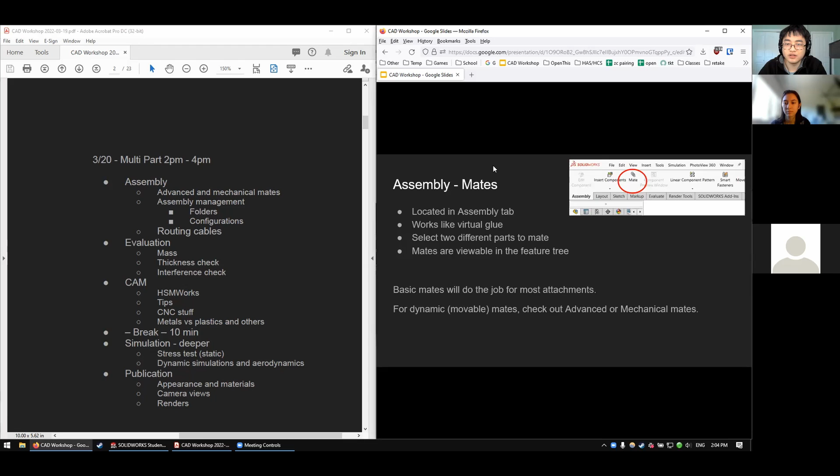Okay, with that said, let's go ahead and get started with this. Okay, so let me close this guy out. And I'll go ahead and get started with the first one on the menu.

First one up is basically mates in assemblies. When you have an assembly, it's made out of multiple parts or even sub-assemblies. So an assembly consists of a bunch of things in it. You want to make sure that those guys are all attached to each other.

So you will generally be using the mate tool. It's located here in the assembly tab, the big paperclip icon. It lets you mate things together. You'll see here, everything's already mated, so this might not be a very good example. But we'll see here, there is a double paperclip called mates here, and it shows you everything, how they're connected together.

For example, we've been using a lot of the basic mates just to fix things together. So these two, the axes of the rod and the rod itself, are going to be concentric. So they're locked in place in that one direction. And then we will set the width to be equal, so it's centered within the two. There's a bunch of tools like this you can use.

Let me just show you what's going on inside the mate feature. So when you click on mate, it shows you this large window on the left-hand side. Basically, you select two or more things to mate together, and then you select what type of mate you want to do. By default, these ones are the basic mates. They do the job to get things done, making sure that things are anchored to each other.

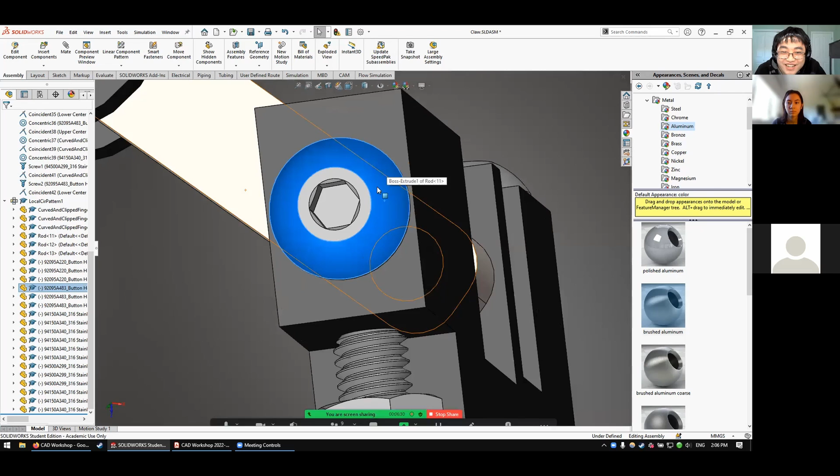That's not a good one actually, that one's movable - try to click and drag it. It's just like fixed or something. I think this one should be... oh, it's not locked down. Okay, so that one is rotating - we didn't fix the rotation of that. That's not a big deal though, it's just a screw. But once you do fix something, it'll be fixed in place because it's anchored in all dimensions.

One of the other things I want to show you was the more advanced mates. So you saw here in the mates tab, we have a bunch of stuff. Width was not in the basic mates tab, I believe - I think it's under advanced. Yeah, so you see here 4 tabs: standard, mechanical, advanced, and analysis. Most of the time, standard mates do the job, mate things together, keep them together. But also some fun ones, especially in mechanical or advanced.

In mechanical, you have a lot of things that let you have stuff that moves around. In this tab, you might be using things like hinges, or maybe gears, possibly even screws a lot. You don't need to use the screw mate for screws like this, but if you want to be super cool and have the threads align in the screw and the recessed hole, you can use the screw mate. For the most part, you just get away with doing concentric, then making sure the head of the screw is coincident with the flat top. That does mean it can rotate, as you saw before, but if you want to get rid of the rotation, you should use the screw mate.

It'll let you rotate it, but it'll then follow the threading of the recessed hole. Some cool stuff there, but I never use it because it's a big headache. I just do concentric and coincident.

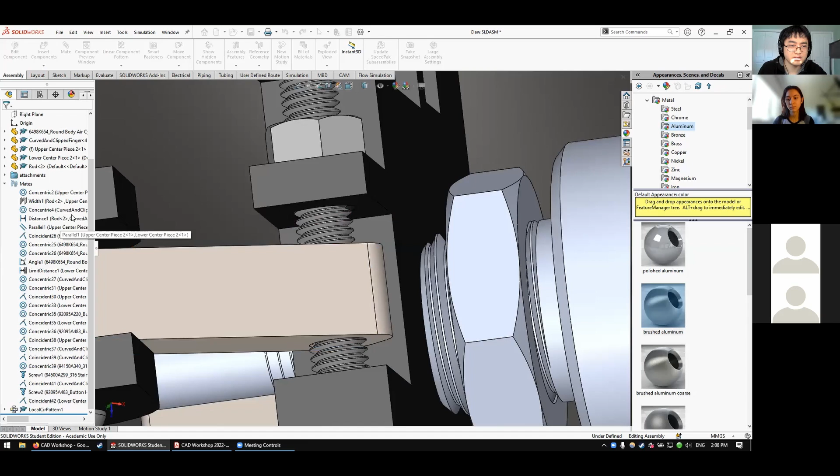These two are probably the most important ones, I think. This one is fixed minimum and fixed maximum distance, and it can vary between those minimums and maximums. You see how that's used here in the claw. I believe it's used, where is it, a limit distance over here.

So this is a piston mounted to a claw. For this design, we wanted a single piston, like a claw machine pretty much, opening and closing the jaws. So to do that, we set a minimum and maximum distance for the piston length. We have a minimum of 5, maximum of 45 millimeters.

If you go out of the mate and try to drag stuff, you'll see it does move around. We can close and retract. It's a cool way to add some... it's fixed? No way, okay, there we go. That was not fixed.

So it lets you make cool dynamic assemblies that actually move. You can show them off. It looks really nice when people come and ask you how it works if you don't have the robot with you. It moves, shows you the range of motion, and lets you see if it's going to work before you even print it out or build it yourself. So good to have under your belt.

These mates let you restrict movement in certain dimensions, and retain some movement in other dimensions. There's a lot more mates than that, but for the most part, the basic mates like coincident, concentric, and some advanced ones like limiting distance for pistons and rotation stuff could be useful for you as well.

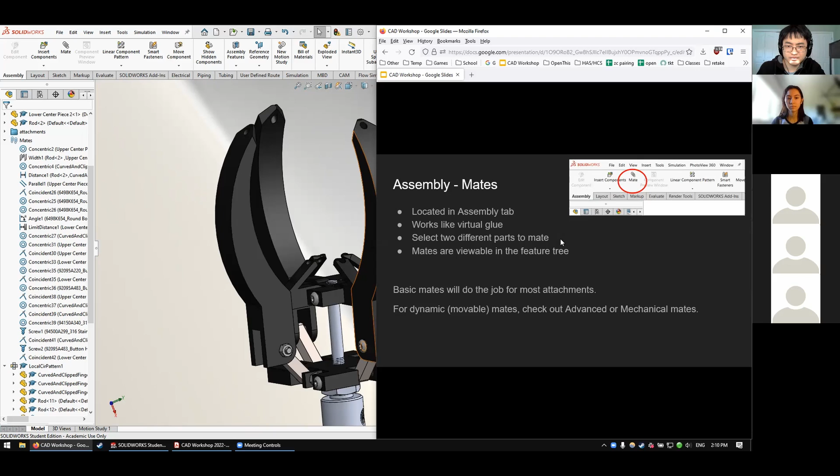Okay, assembly management. So you see here on the left-hand side, it's pretty messy, a bunch of stuff. Some of them have numbers in front of them, like part numbers from McMaster.

When you have an assembly, especially when it has a lot of parts, you'll want to use folders. Especially, you want to make sure stuff is named appropriately so you can find where it is. Just earlier, I made a folder for attachments that contains a bunch of screws and stuff. See how those orange bounding boxes hover over the screws and nuts.

You can add stuff to folders here. It doesn't really change anything, it just makes sure it's nice and grouped. You can find where stuff is, and just hide it when you don't want to see it. You want to focus on the big pieces.

To do that, you click on one or more. You can click on one and control-click on other ones, or click on one and shift-click on another to select everything in between. So select multiple or just one, right click, and hit add to new folder. Alternatively, you can just drag and drop it into an existing folder.

So just be sure to use folders when you're making large assemblies to make sure things are organized. You can still keep the main body pieces at the top root level, that's fine. But for small attachments, you probably want to keep those tucked away in a nice folder somewhere so they don't get everywhere and junk up the left-hand side.

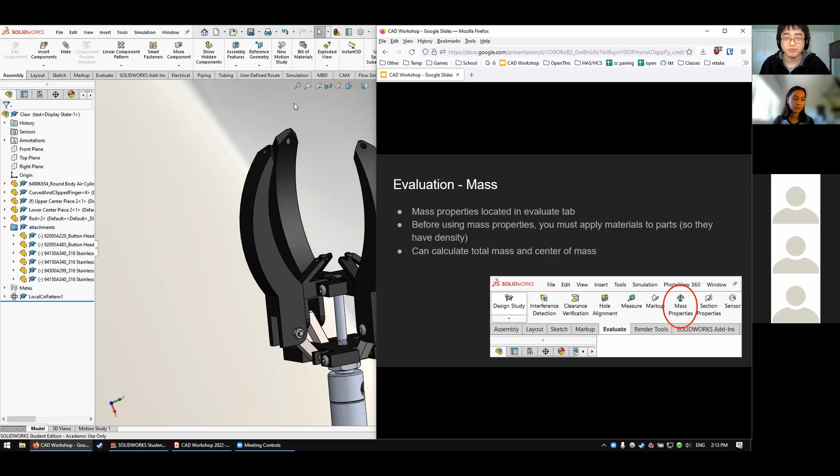I think I might pass the next one off to Naomi if you want to pull that up. Let me stop my share. Okay, one more thing I want to note about organization: you should keep all the files for an assembly in the same folder on your computer. Otherwise, you run the risk of SolidWorks not being able to find it, which is really annoying when that happens.

So for mass properties, I have here a really simple assembly, and I have applied materials to it. When you do mass properties, it's really important that you apply materials to all the parts in the assembly. Otherwise this won't work because SolidWorks won't be able to figure out the densities of the materials. So I'm going to show you real quick how to do that.

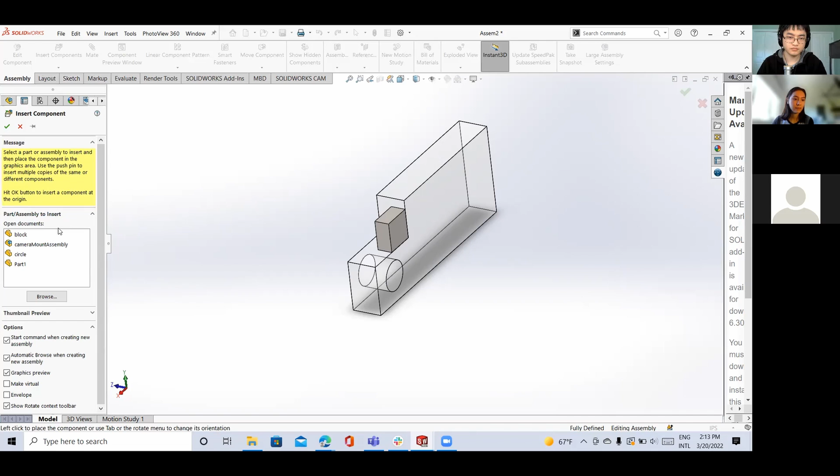First, I'm going to insert one more component. Let's do this circle. Okay, so I have my circle in my assembly. I'm going to real quick mate it somewhere. Let's mate it here. That was a horrible mate—hold on, that was a really bad one. Okay, let's try that again.

So that button we just clicked lets you flip the alignment of the mate. That's an important thing to do if you ever get stuck and have something clipping inside of the object—you might need to flip the coincident mate. Okay, that is good enough.

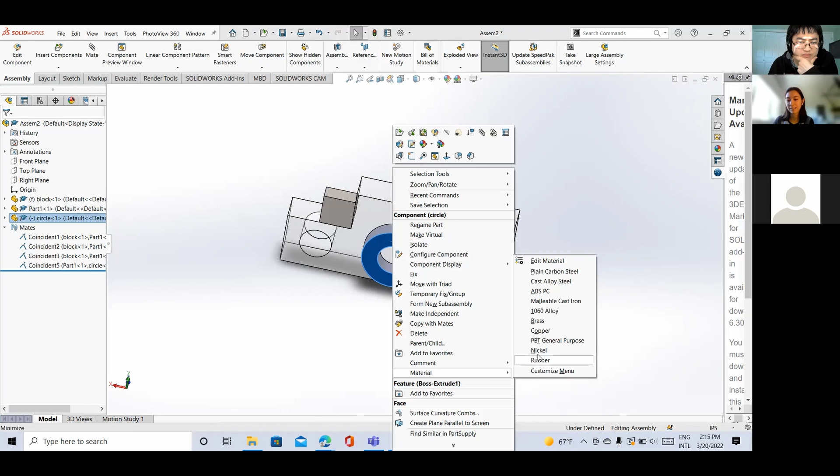So now my assembly is all mated together, and now I need to apply materials. I'm going to right click on this, and this menu comes up, and at the bottom right here it says material, and I'm going to come in and edit the material of this part. I have all of these options here, and for the purposes of demonstration it doesn't really matter, so I'm just going to choose hot rolled bar steel and apply it. I think it's applied—so now I'm close, and you see the color has kind of changed.

I'm also going to show you how to change the material for something that already has a material, and it's pretty much just the same thing. You right click material, edit material—you also have this little shortcut menu. So I'm going to change this to brass.

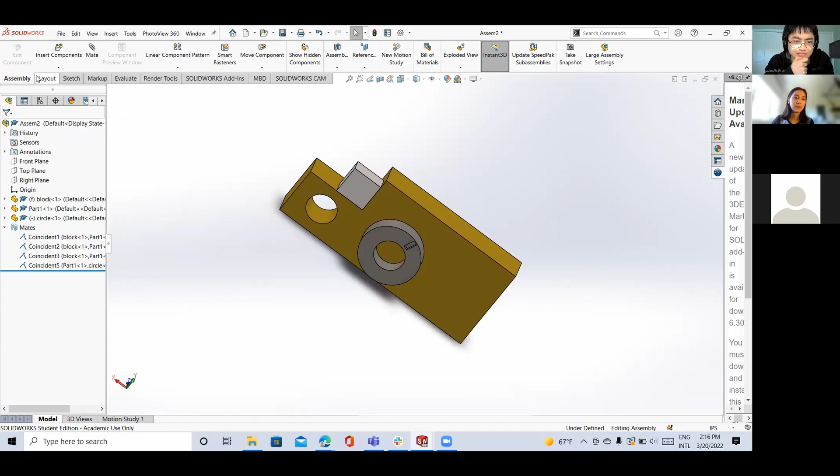The color has changed. Now we go to the Evaluate tab, Mass Properties, and Rebuild, and it comes up with this menu that gives a big summary of all the mass properties. The important parts are the mass, 5.88 pounds, the volume, and the center of mass. Everything else is kind of complicated and you probably won't be using it, but those are really useful things—we especially use volume because we work underwater, so volume is useful for calculating the buoyancy of our ROV.

So yeah, that's how you use the mass properties. Next one up—let me share my screen again. As you saw in the image, just showed you mass analysis: you can see how massive it is, how much volume it takes, center of mass and stuff.

And a short departure, you can also take a thickness analysis to see how thin or how thick stuff is. This can't be used on assemblies, only parts. So let me just demonstrate what I mean by that—let me go ahead and open up a part.

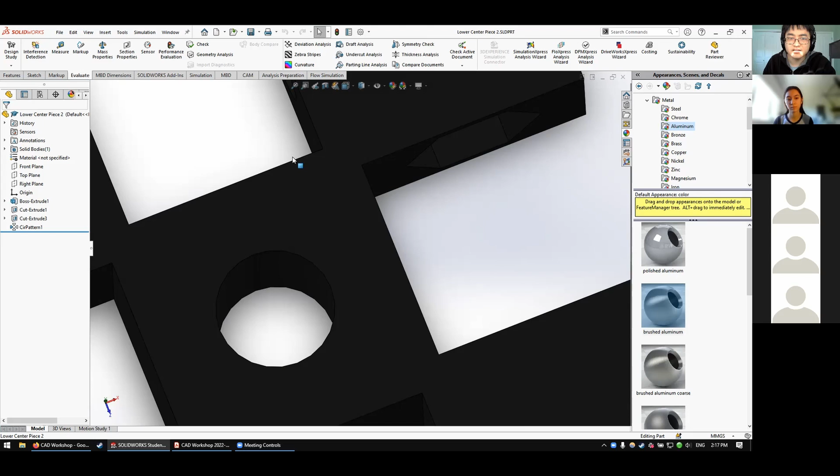So I have here a little piece, and I want to go ahead and see how thin stuff is, because I want to know if this distance from the hole to the left side is too thin to be printed or something, and might just snap off immediately. I want to know how thin that is, and how thin this diagonal is. You could, of course, just manually measure it using the measure tool, but then you have to measure everything, and you don't want to do that.

So just press the thickness analysis—it's under the Evaluate tab. Set the analysis parameters, thickness scale, nice color scale, and hit okay. Oops, I need to hit sort of face, I believe... show thin regions. It's not showing up—I think I need to select this even lower. Okay.

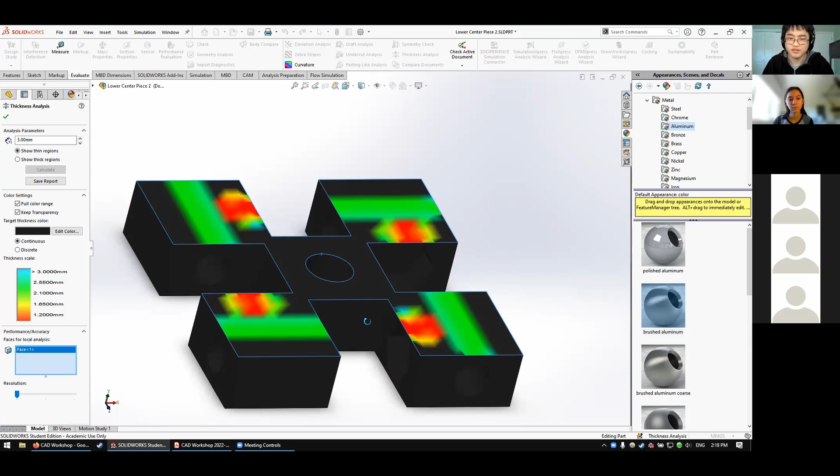Okay, so it's also showing me stuff inside. In this device there are small screw holes that we're gonna thread some rods into to secure this stuff. You see here the scale: red means really thin, green and blue means okay-ish. It gets really thin around here, I cannot even see that. Let me see if I can orientate the screen even better.

This hexagonal face is very thin to the roof, so that might be something to look out for. It's about 1 millimeter. If we try to print this, it'll probably be okay, but be careful, it might snap off. Keep that in mind as you design your stuff.

You use your thickness analysis to see if something is really thin, something you haven't considered. I did not consider this actually. I was only thinking the diagonals here might be too thin, but this stuff's really thin as well. I think it's because I selected my local analysis face to be only the top, so it only checks from a face down view - will the thickness from the face down be very thin? So it did not measure this, only measure this.

I think if I cleared here, and I will do it for everything. Let me just do a quick check. Okay, it does it for more things now. Not everything that I wanted, but good enough. So use thickness check to see if stuff is too thin or too thick to be printed.

Okay, then keep opening the wrong PDF. Once again, only for parts, unfortunately, but you can just run it for multiple parts in the assembly, so that also works, but just a bit of a hassle.

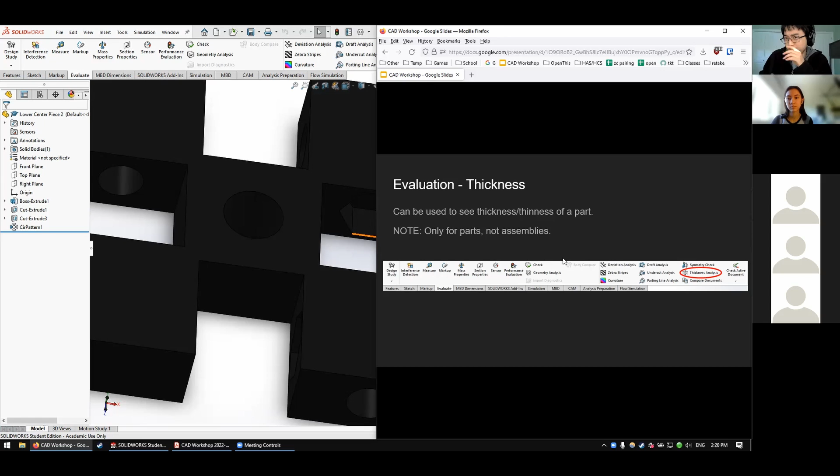And the next one I want to show you, or do you want to show this one, Naomi? I need to get stuff prepped for the next part. I don't think I have the right part open for this, but I can make something interfere. Okay, gotcha, okay thank you. All right.

So I'm gonna real quick go back to that horrible mate I did earlier. Perfect. Now the...

Interference detection shows you where parts are overlapping in your assembly. So we can either select the whole thing, or if you don't want to run that, say you have a really complex assembly, you can clear that and select only the parts that you want to check for. If I calculate this, it'll get mad at me and make an annoying sound and say this part is no good.

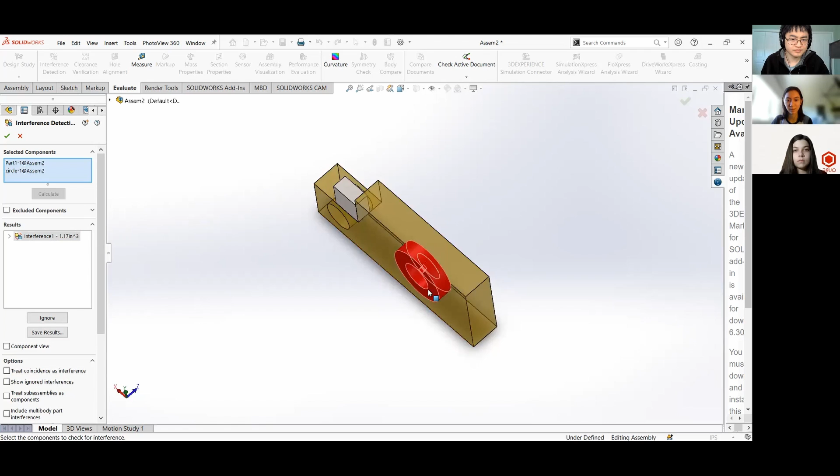And if there were more, it would show each individual interference in this box here. So I can also show if I did the whole thing - it shows the same thing because there's only one interference.

One thing to note when you do the interference check: if the number to the right of the interference is really, really small, it's probably a very small clip, like the threads of your screw digging into the wall of the hole - that's no big deal. But if it's something larger, then something's an issue. You need to check your mates, see if stuff is clipping too much. But for very small numbers that happen, it should be okay.

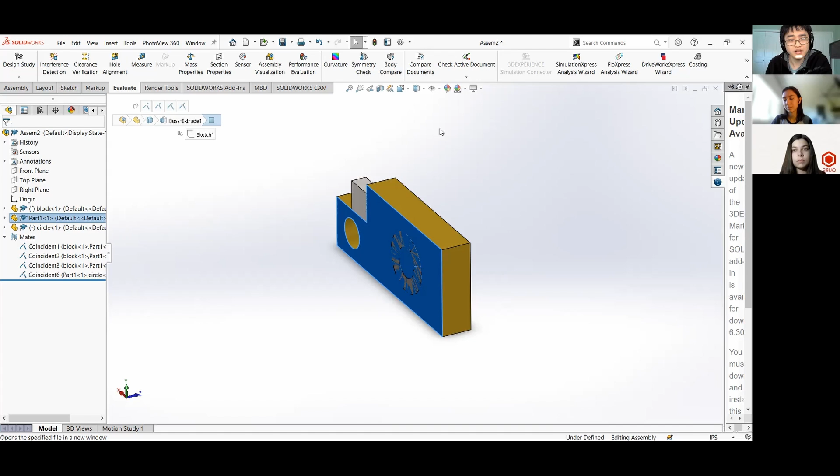So let me see if I can open up the part that's being talked about here. We use the plugin HSMWorks from Autodesk - it's an Autodesk-made plugin for SolidWorks, made by Dassault Systems, so it's kind of weird. There's also built-in CAM solutions and CAM plugins in SolidWorks, I believe, but we've been using HSMWorks, previously known as HSM Express, and it has been doing the job pretty well.

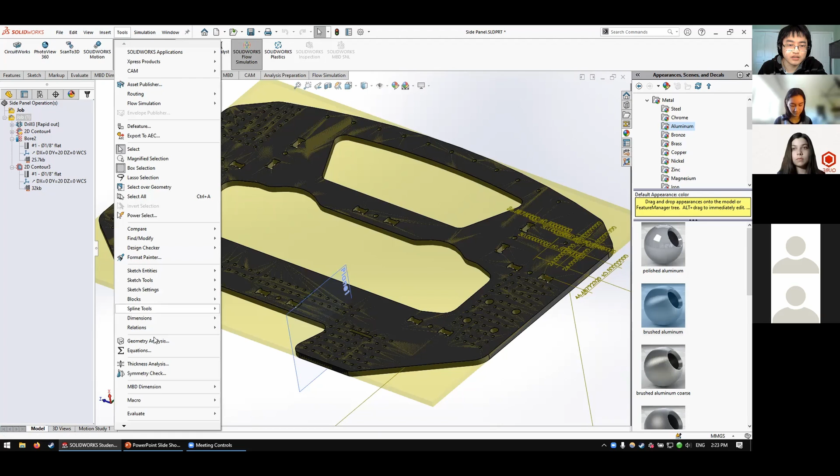So I'm currently in the CAM manager here on the left. You'll notice I have enabled, under add-ins, the HSMWorks plugin, which is currently on. You can also use the built-in CAM stuff here, but this works as well.

So basically, when you want to use a CNC mill or generate a CAM job, you will want to use SolidWorks and then generate a toolpath here. So I have here the default job, which has nothing in it, and job 1, which has some stuff in it actually.

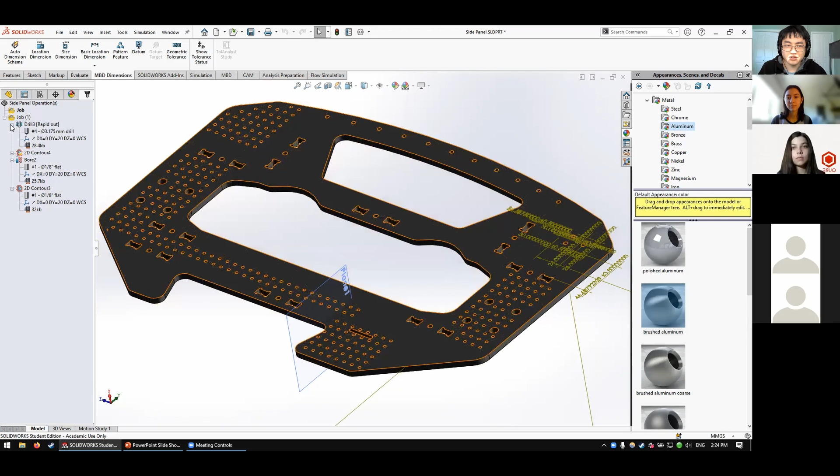When you generate a CAM job, you need to take note of certain special considerations, specifically what size drill you're going to use and what path you want to cut, what holes you want to cut. We're currently setting a 3.175 millimeter drill, which is nice because we want to cut out a bunch of M3 holes for modular attachment mounting on the panel, so you just dig down and straight back up without needing to wiggle around. If you select too large a drill, you can't dig through the holes because it'll make the hole too big, so consider the drill size as you make the jobs and design your parts.

You see here, dx equals 0, dy equals 20, dz equals 0, WCS - I think that's world coordinate system. Basically the drill is going to start at 0, 0, 0. You're going to zero it at this position, so when you put your stock material in and start the CNC mill, when you zero it, it'll say I'm at 0, and that 0 is defined as this coordinate value. So that's something to consider.

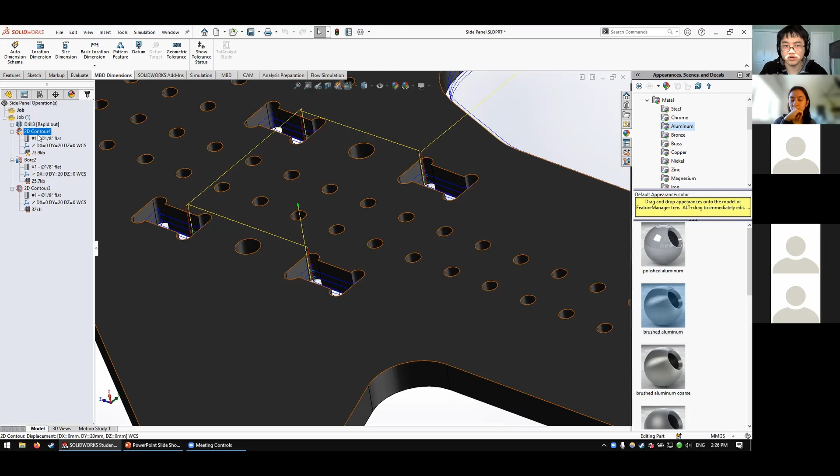And then we have here 2D contour 4, bore 2, and 2D contour number 3. So contour 4 digs out multiple things - these large notches for interlocking with other large HDPE plates for the body of the robot. Basically we've set the settings for the drill, and then we have a bunch of different toolpaths done in sequence. First, the drill digs out these large notches for interlocking with other plates. Then it lifts up and goes to bore 2, which digs out large mounting holes here, here, and for these guys over here, and for the top handle for padding.

And then lastly, it's going to do the outside edges - the blue lines here notify the outside edges. I'll show you. If you right click on it, you can see a bunch of different stuff. The most important ones here are probably generate toolpath, simulate, and post-process. So I'm going to click on simulate to show you guys what will actually happen.

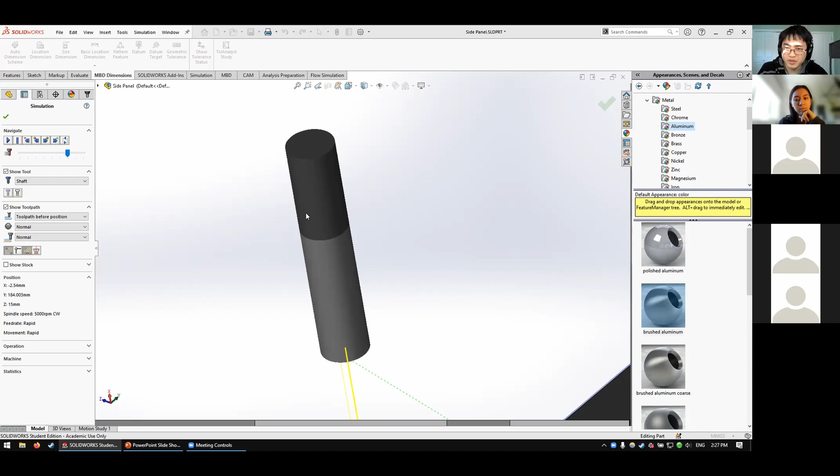I wish I was at the lab - if I was, we could actually show you how it works, but it takes a while to set up. You see here, that little guy is the M3 drill, 3.175 millimeter diameter. If I click on the play button, it's going to start moving around - starting here, doing the small holes first, going around nice and easy.

Let me bump up the speed a bit. Yeah, it's pretty nice - it's like looking at a 3D printing slicer and checking out how the thing's going to be cutting stuff. Very similar to that - layer by layer, path by path, it's going to cut out the material you want.

Once you've set up your paths and checked a preview for any issues, you can then generate the toolpath - click on this button, it'll save some things. Sorry, I got the order wrong - you generate the path, then you simulate the path, and then you post-process it.

If you consider that cheap, that is. Okay.

So you see here, just be sure to check the right box for your machine. You may need to go to your manufacturer's support website and download the right configuration files, but it should be in there somewhere.

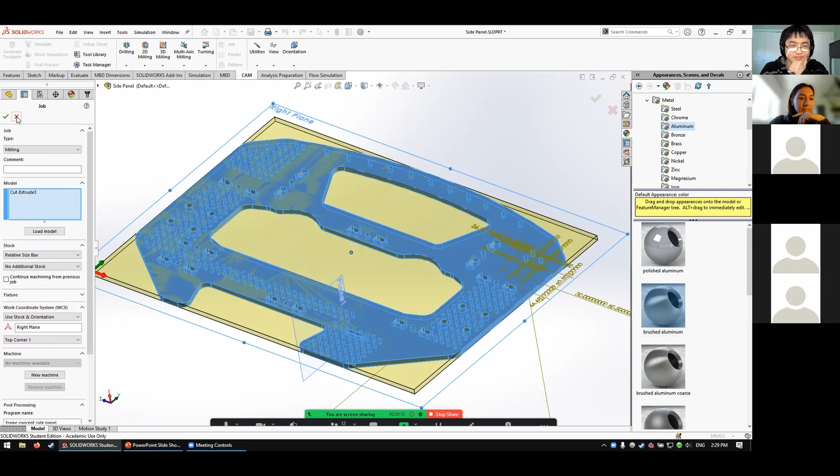So there are a few different options you have when selecting what type of operation to add to the job. You usually want to stick to drilling or 2D milling. Since we do routing, that's what we stick to. Drilling is for boring out holes.

Can you go to the drop-down tab for 2D milling? It's really slow here. Okay, so for 2D milling, I was just making a new drill. 2D contour, that's kind of weird, but this one also does the inside edges, so we can do this one. Let's take a look inside here.

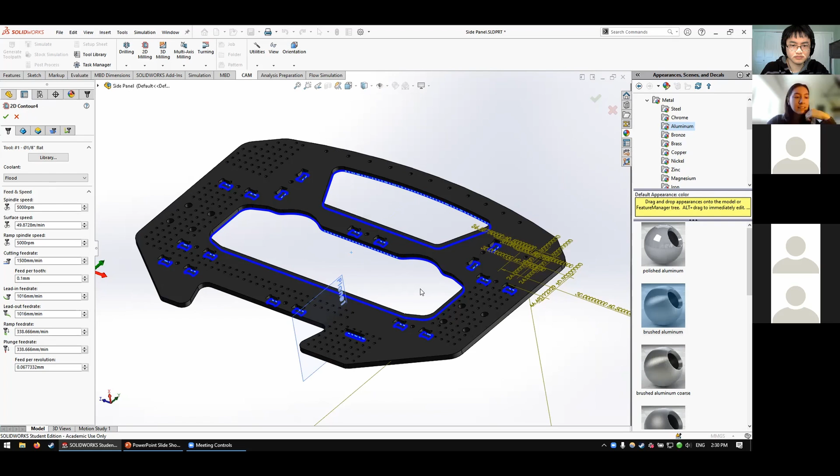So this is one of the plates from, I think, two years ago. A bit outdated, but it still shows you everything that happens. A 2D contour is going to cut out a kind of weird looking shape like we have here, these little hourglass things. I don't really remember all these little settings, but you want to select, I believe, the bottom edge of the shape you want to cut out.

And then you're going to have to adjust the feeds and speeds, and that's going to depend on the material you're using. Since we use plastic every time, it's the same for us every time, but you guys might use aluminum or steel, so you're going to have to look that up.

And then we also use some other types of 2D milling. Can you do the little drop-down? Oh, fancy, okay. Yeah, I need to close out this one. Can you erase your annotation real quick? Okay, so here, what do you want to look at?

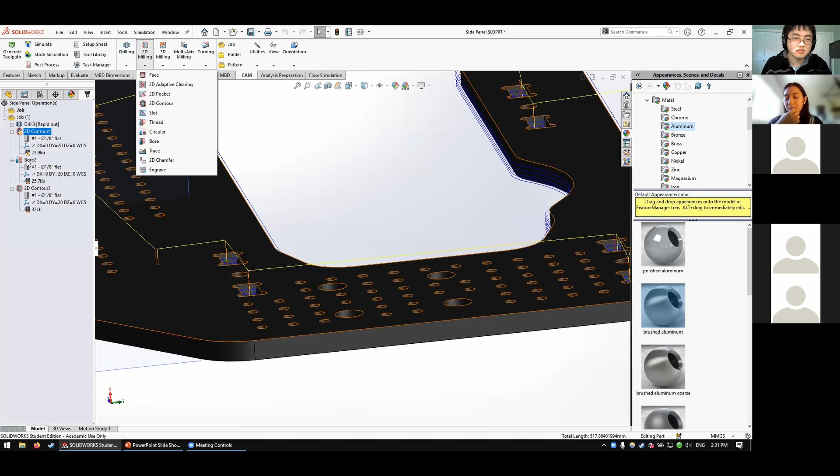Bore? That's just like straight down, almost. Bore is for boring out holes, and that's just going to bore out with the diameter of your end mill. I want to cut it real quick to show - it will drill down, and if it's larger than the drill size, it will do a little wiggle around to make sure it's large enough. So not just the size of the drill, but also a little bit larger if you want. It's pretty versatile, it cuts out circles.

And then for other things we use 2D adaptive clearing, and all of these basically are different for different types of cutting out - they cut out different shapes, so it's different for different types of shapes. Sorry, that wasn't very eloquent.

But the really important thing you want to do when setting this up is make sure that the direction your end mill is spinning, with respect to the way it's moving, is correct. You can typically see that when you do your simulation, but you set it up when you're setting up your job. SolidWorks usually does a pretty good job of simulating that, but sometimes it won't show.

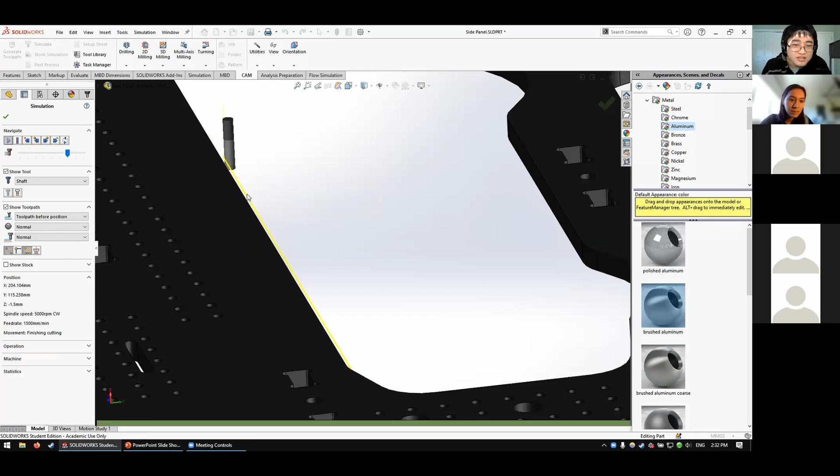Yeah, I don't remember how to check it. I clicked on simulate, clicked the play button - did it go? Okay, there it is. Does it show rotations? It doesn't show rotations, but it'll show which side it's cutting out, and if it's on the wrong... oh I see, spinning - it says clockwise, 5,000 RPM clockwise. So clockwise, yeah, that's okay here. And if it's spinning the wrong way, sometimes it won't generate the toolpath.

So notice we are moving counterclockwise. We want it to spin clockwise so it spits the material out behind it as it goes forward. So that's something to consider as you generate your tool paths. Let me see - okay, I think that was pretty good.

I also wanted to go over this, it's a big wall of text, but let me go over it real quick. With Slugbotics, we have a general workflow for how we do CAM stuff. It's a long list, but basically we start in SolidWorks, then design the toolpath using HSMWorks, tweak it and check it to make sure it's okay, then save it, load it on the laptop, go to the X-carve, our 2.5 axis mill, and cut it out there.

So, important key points to consider that I haven't already gone over: step 8, performing the mill preparation steps. When you actually use a mill, you need to make sure it's zeroed in and that the machine knows where the drill bit is.

To do that, there are special tools you can use. Since the drill bit is usually metal, you can have another metal block right beneath it. When it touches it, it sends an electrical signal and says stop here, you're at 0, 0, 0. That's pretty neat. You remove the metal block and you're ready to go. Of course, you need to place your stock material underneath.

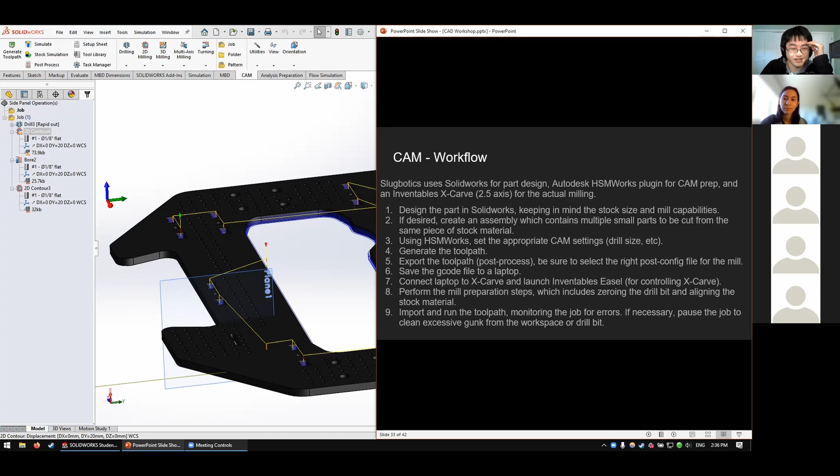So some tips to consider as you do CAM stuff: consider how important the piece is. Is everything going to be hinging upon it? If so, you're probably in the right place, you want to use CAM and choose the right stock material that's strong enough to bear it all. But if it's a small, minor piece, why bother with CAM? It's a big hassle, just 3D print it, especially if it's not load bearing or anything.

3D printing will probably be cheaper, faster, and easier to prototype. In any case, if you do CAM stuff, you probably want to do a 3D prototype first, or at least do extensive verification to make sure things are okay, because once you cut it out, it's pretty much not possible to add material back. So be careful what you cut.

If you're milling many small objects, consider how you can orient and fit multiple parts to be milled on the same piece of stock material to reduce wastage. Stock material usually comes as a large sheet of metal or plastic. For us, we tend to buy 2 foot by 4 foot sheets of, I think, quarter inch HDPE plastic. Since some parts we need to mill are pretty small, we can fit them alongside other larger pieces to reduce wastage.

So just be sure, keep in mind, how can I orient stuff to mill it out? The chat box says we have a CNC for our FRC. We don't use it for FTC. Cool, send your design to a third party. Yeah, that's also a good idea.

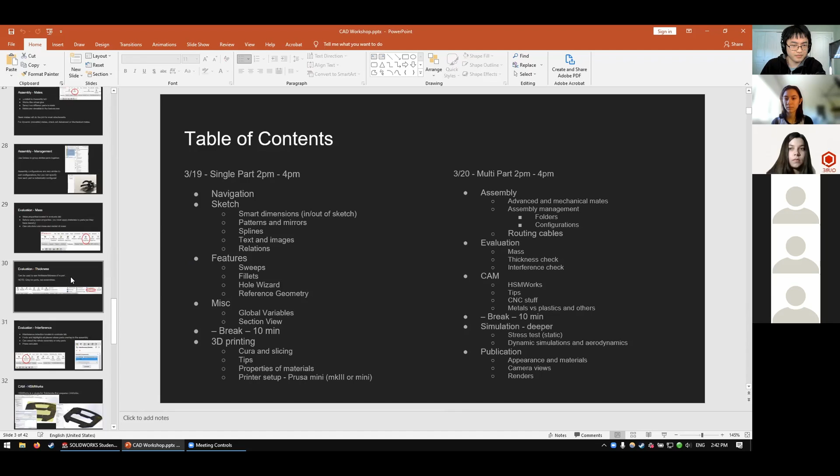Is CAM used to cut materials out to desired shape? Yes, CAM is computer-aided manufacturing. You can basically consider it like reverse 3D printing. Instead of printing additively, layer by layer, you now cut layer by layer out of a large piece of stock material.

So when I had this guy here, you can consider as if I had a large piece of black plastic, a rectangular prism, and then I used the tool path to cut out shapes. So I have this guy left over.

Another question: do you have to open a separate file in order to assemble stuff? Kind of, yes. In SolidWorks you have SLD PRT files, solid part files, and solid assembly files, SLD ASM files. Assemblies are combinations of parts and assemblies. A part is just a singular part, nothing else in it, just sketches and features.

So when you want to make an assembly: file, new, and then the three handy buttons - part, assembly, drawing. Usually you just do parts and assemblies, but the description says 3D arrangement of parts and/or other assemblies, so assemblies can have other assemblies in them. It gets a bit complex, it's assemblies all the way down kind of thing, but yeah, assemblies are nice. Good questions.

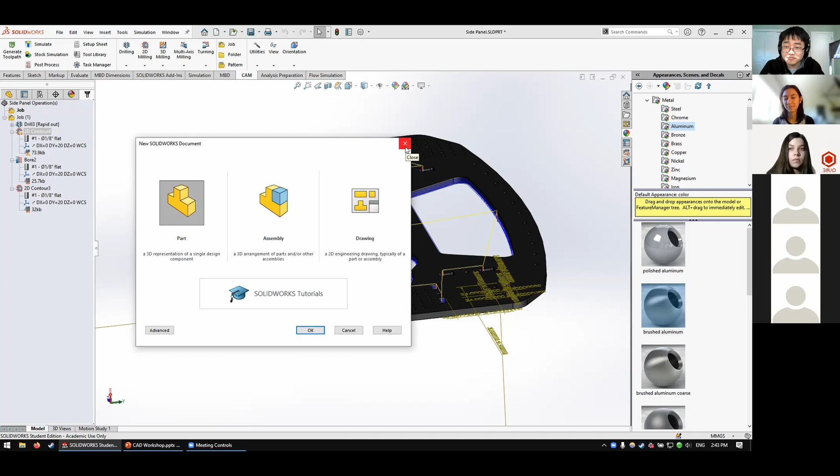I see a question in the chat as well: how do we set up something when cutting something out for CAM? So for setting stuff up here, I kind of skimmed through setting up a contour pretty much, so let me go ahead and see if I can show it.

I'll remove the outside edge and redo this one. If I want to add a new cut path, I will right click on the job I want to add it to - I can add it to a different job if I want, but I want to add it to this job so it'll be all done in one go.

So I'll right click on it, new operation, I want a 2D mill, I want to follow a contour, 2D contour. Oops, I got interrupted by the autosave, it closed my context menu - how nice. Okay, new operation, 2D mill, 2D contour, okay.

Once again you see a humongous list on the left-hand side, bunch of numbers, bunch of stuff. Let me go ahead and click on the bottom edge. Now it has highlighted in blue the whole bottom edge of the thing. I chose the bottom edge because that way it'll cut down to the bottom edge. If we click the top edge, it won't cut anything, it'll just trace the top of the material along the top edge - so that's no good. We want to click the bottom edge, so cut through the material to the bottom.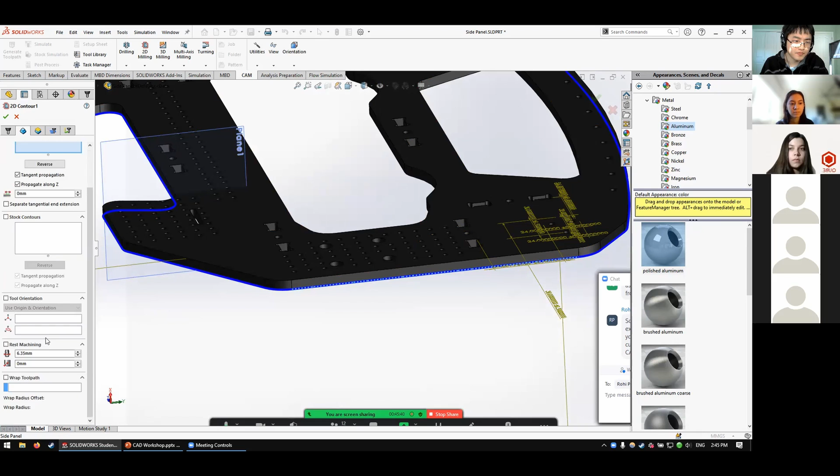Let's click on OK, let's see what happens. 2D contour - now if I want to simulate this, let's see what happens, if I can generate a tool path for this guy. Oops, it's already valid, let's simulate then. Okay, so there's my drill bit over there.

Oh, okay, so that's no good - it's going to drill into the thing, so I did not set that up correctly. I wanted to go on the outside edge. Let me go back and modify this - edit.

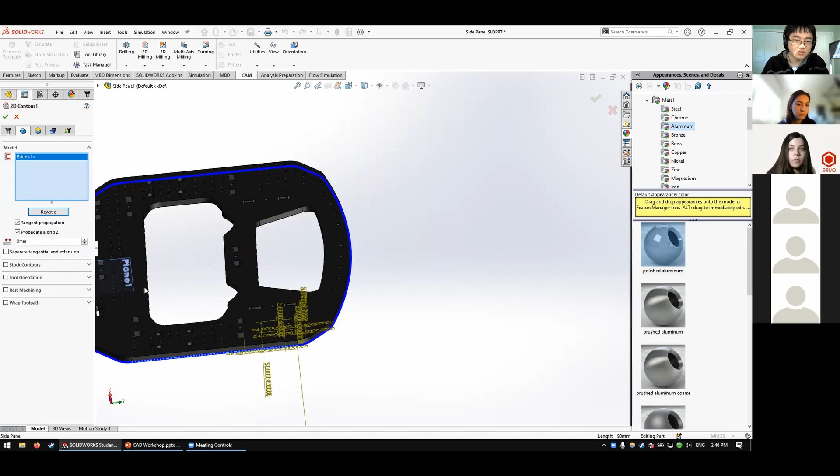Okay, so where can I see what's going to be inside or outside? Reverse direction - did that work? Tool orientation, let's see, just use the origin. Wrap it around, rest machining, stock contours - I think this should be good.

I've been in a sub option, let me see - simulate again. Is it still inside? Okay, now it's outside, okay, that's good.

So I'll click on the play button. Okay, and then I'll trace along the outside edge.

I think one thing I did not do correctly on this one was that it's just straight down into it. Usually you want to start at the top edge, drill around it, go down a little bit lower, drill around it, a little lower, drill around it, a little lower, drill around it until you get to the very bottom. So I don't think I set this one up correctly - it should be drilling slowly, layer by layer, millimeter by millimeter down until it gets to the bottom of the material.

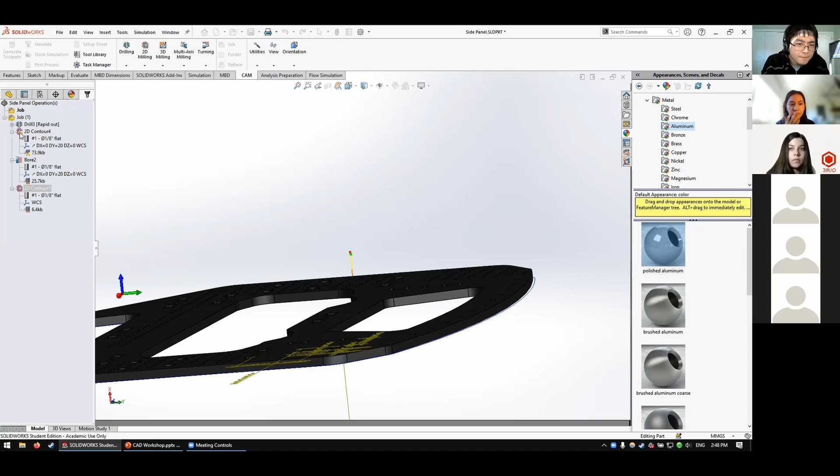Let me see where the exact setting was. Well, for the bores, those guys are set up correctly. 2D contour, this guy's set up correctly. How did I set up this guy?

Just to reiterate, I need to be careful of whether the tool is going to be on the inside or outside edge, that will probably mess things up. It's on the inside edge, so make sure it's on the outside edge. Also consider, I think it automatically does the rotation clockwise or counterclockwise depending on the direction of motion.

Okay, passes, here we go. Passes, multiple depths - so I had multiple depths for this one. That one had multiple depths too. So I think the other guy needs multiple depths at 1.5mm increments. Edit - there's a bunch of subtabs. Let me click on the subtab for multiple depths. And here goes, multiple depths at 1.5mm increments.

Let's click the OK button. Generating... let's see, okay I like that already. Look at that, multiple blue lines. Before we had just one blue line along the bottom edge, now we have multiple blue lines. So I like that. So I made a new 2D contour.

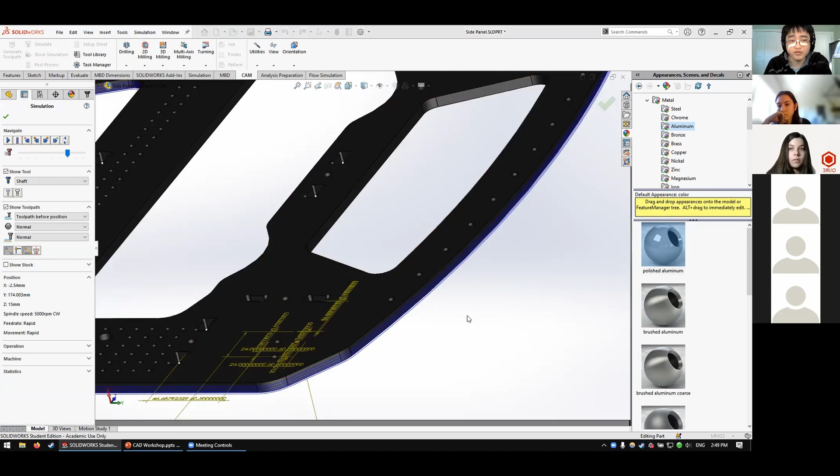Okay, I like that. Let's go ahead and click on the play button. So first pass is very thin, a mere 1.5mm from the surface. Let's go ahead and speed that guy up. Very nice, okay I like that. So I think this is good now.

Before I send this out for real though, I would probably double check, see if the velocities are consistent with the other jobs, make sure it's gonna be okay. But yeah, it looks good to me. So that was just an overview.

I selected the contour, the bottom edge. I checked the direction, made sure it's not on the inner edge. I then added multiple depths to make sure it's not gonna dig straight down and break the drill in one go. I also repeatedly simulated it to double check it's gonna be okay. And then finally I can post-process, send it out, and mill it out. So a couple steps to it, but always simulate - simulate is your friend. And it looks nice too.

Okay, I think I ran through all the chat questions. Any other questions pop up for you guys? If not, I think this is a good stopping point. We can stop here and come back at 3 o'clock.

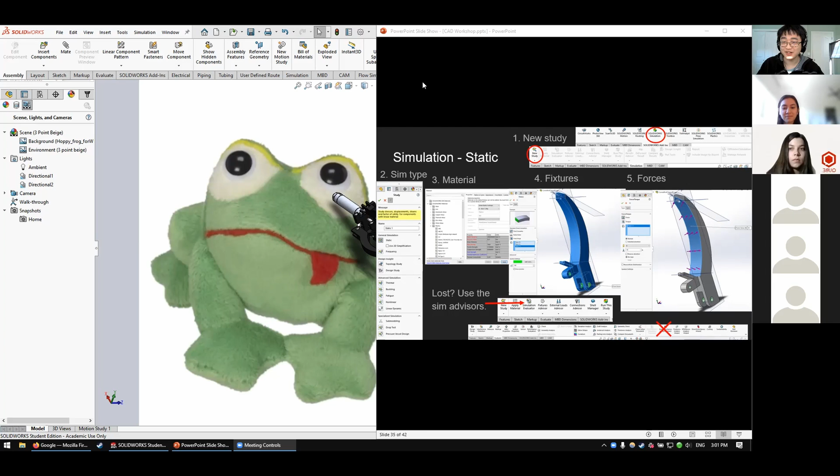Okay, so you see here on the left, we have good old Froggy here. I was just playing around with appearances, we'll go over that later. We can have some images for your background, so we'll see more Froggy later, maybe. But in the meantime, let's go over simulations.

So simulations, let me pull up my example I pulled up here. Okay, there are a lot of simulations you can do in SolidWorks. For the most part though, you probably focus more on static simulations. And if you're doing really high speed stuff in fluids, air, water, whatever, then you might want to consider aerodynamics and fluid dynamics, fluid simulations.

But we'll first go over statics and then we'll go over to fluids later. So basically this slide highlights how you set up these simulations. I'll actually show you step by step in SolidWorks, but just to give you a high level overview so you don't get lost, here's what's going to happen. I'm first going to make sure here in the top right, make sure I have simulations add-in enabled. I have these simulations here. And then you can start making a new study.

One thing before I go any deeper: at the very bottom of the slide there's an X over Simulation Express Design Wizard. I think this is the free version. If you don't have the educational version of SolidWorks with all the plugins, you might be limited to this, meaning certain studies aren't available—just the basic static study, like a constant force along one edge or plane. But if you do have the plugin, it'll show up under the add-ins tab.

You can click the button and it enables a simulation tab. Once you do that, click on new study. On the left-hand side there's a gigantic list of things you can do. The default, static study, is usually what you want. It lets you designate a force on a certain face, specify how heavy that force is, what parts of the body are fixed in place, and then you just press run.

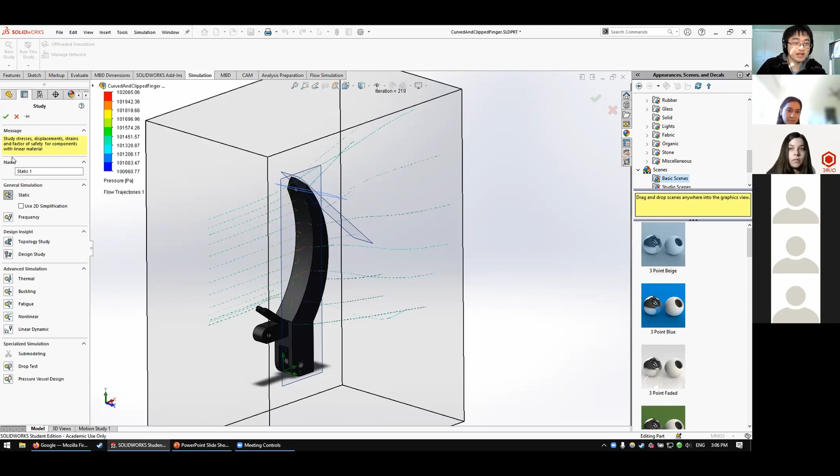I'll take a new study right now, a new static study. I'm going to set the material as plastic. For plastics, I want PET. I forgot what it stands for, it's like polyethylene something.

Okay, I clicked apply and it seems good. Now it's grayed out, that's okay. I want to select what's going to be fixed in place. On the left-hand side there's the simulation advisor, a nice step-by-step walkthrough that even tells you what it's about to do. It handholds you through the whole thing. It's really nice, if you get lost, click on the advisors and they help you out.

I want this hinge to be fixed, and this guy, and this guy. Oops, I didn't select them. Add a fixture. Select this guy, select this guy, select this guy. Notice here, those little images are like mini coordinate systems pretty much. Ignore all these arrows flying around, that's from the aerodynamics simulator. I don't want to disable it because I think it might break or something and I'd have to redo it, waiting another 15 minutes. So I'm not going to do that.

Okay, I am done making the fixtures. Let's go to the next advisor. Oh, interactions, create more interactions. What is this? I'm done with fixtures, I want to add external load.

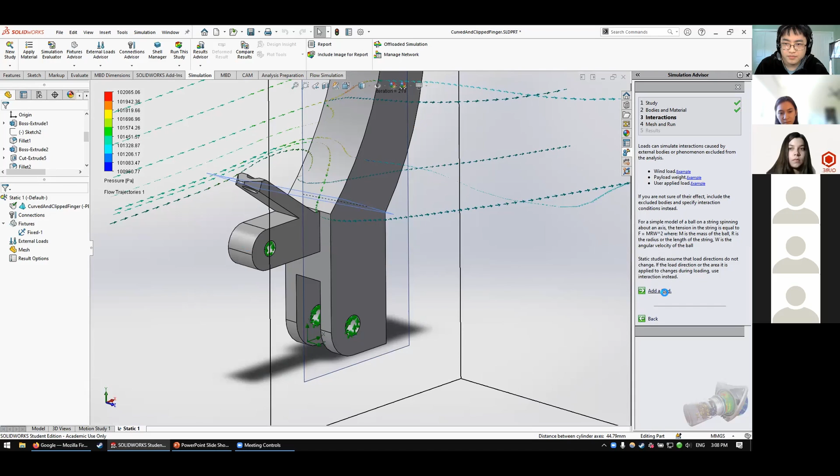Add a load, then select a face to apply the load to. So add it to the inside face. Let's do 10 Newton again, just as an example, applied uniformly. And then I have material, I have the fixtures, I have the load, I can run it now. Let's see what happens, so let's run the study. It's pretty fast.

Okay, notice here, before this guy was right on the edge of these arrows, now it's being pushed back a bit. We can't currently see how good it is right now, but let me see if I can make this a little better. Displacement is usually the nicest one you want to check out.

Notice the scale on the right, URes. I forgot what that stands for, but it's like displacement in X, Y, and Z, so net displacement pretty much from the original point. Red means severe, blue means okay. So 1 times e to the minus 30 is basically 0 if you remember your exponents, 0 at the bottom. And what is that, 7.2? I presume that's millimeters, 7.2 by 10 to the minus 2, that's tiny. So 10 Newton force is not going to bend this at all, it'll handle that I think.

So let me see if I can edit this. Edit definition.

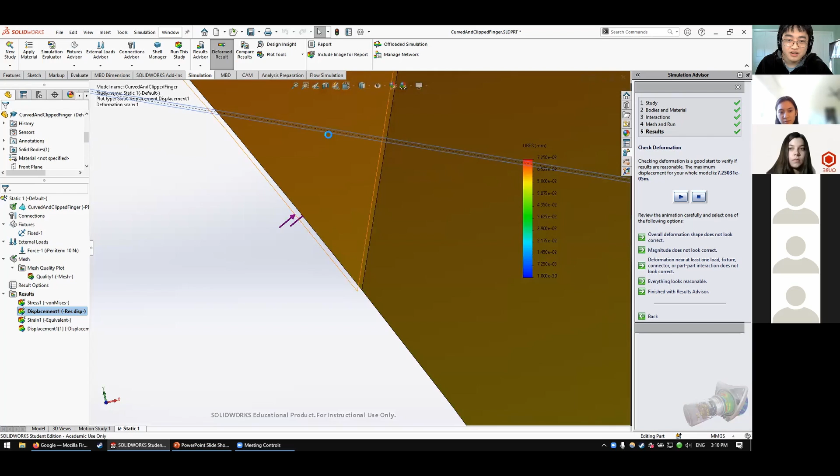And then deform shape, this one's also really important. Currently it's at 227 times scale, so what you see here is not what's going to happen in real life, it's exaggerated so you can see how it goes. True scale is a very, very minor change, see that? That's the change. By default they exaggerate it because they want you to see how it's going to change over time.

There's also a funny one, you can animate it. Yeah, that's pretty nice, look at that RGB for all you gamers out there. You can speed it up or do some more frame stuff, I don't really play around with this though. I think you can export it as like an AVI file, if you want to make another nice GIF for Discords or something, you can do that.

So other types of results you can display, stress, they're all pretty similar for the most part. I forgot what von Mises was for. Shows the stress, von Mises stress, Newtons per square meter, yeah that sounds about right. Stress, force per area.

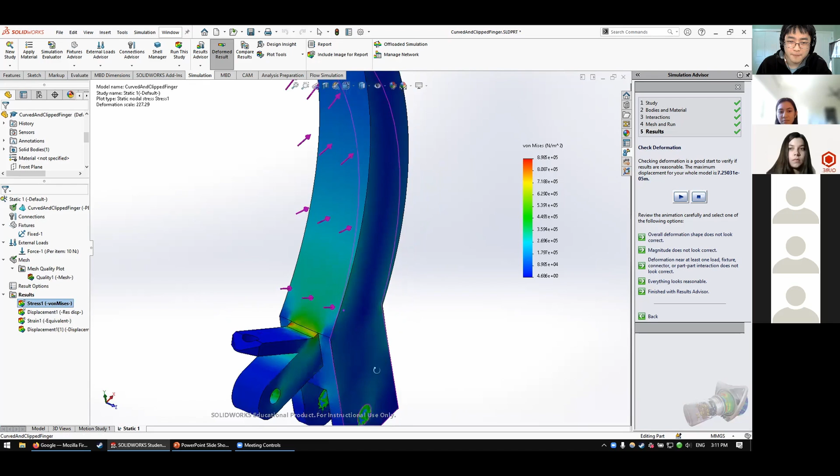Okay, so a lot of stress at the pinky and the horn over here. That's pretty severe, so I'm going to be careful about that. It helps highlight structural deficiencies, and it's rather fast to simulate as well. So something fun to do.

And strain, equivalent strain, a lot of strain here on the pinky. Let me see, that seems okay. And once again, E strain, no units given. Displacement, what is this? This is like a blank one. Okay, resultant displacement, okay so that's pretty good.

Let me see back at the slide. Yeah, so I just showed you guys changing the definition, making sure the scale is what you want it to. You can define it yourself, 100 times scale, 10 times scale, or just do true scale, 1-to-1. But usually you don't want to do true scale because it's super hard to see the difference. You'll only be able to see the colors.

All right, one more thing. Let me see, where was it? Results, displacement, I think it was here. I thought there was a way to... chart options... there should be a way to modify the color scale, I believe. I forgot where it was. You might be misremembering. Okay, never mind.

That's fine. But yeah, static simulations give you an idea of what's going to change and by how much, approximately. Of course, real world conditions will be different. If you 3D print stuff, the internal structure that you use to print with will not be completely solid unless you do 100% infill, and even then it still won't be perfectly uniform. SolidWorks is going to assume it's perfectly uniform inside. So it gives you an idea of where you might expect stuff to break, but if you do it in reality, it probably won't break like that.

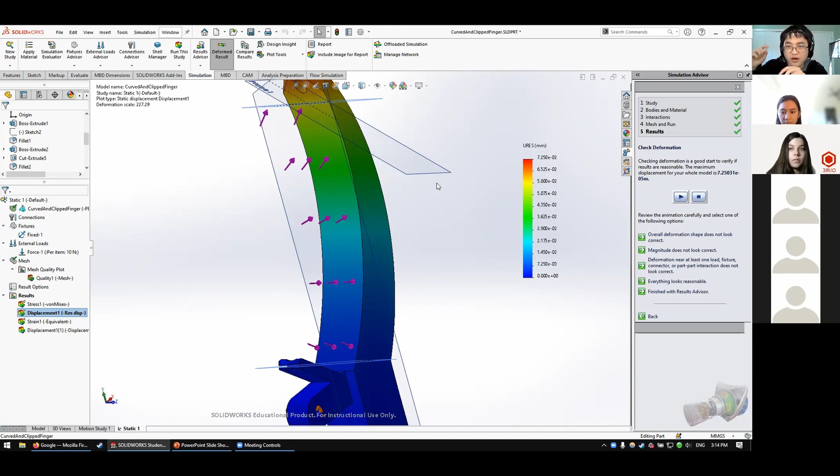And of course, in reality, your force is not going to be uniform and uniformly applied to a surface and normal to it at all times. So another trick you can do: if I wanted to have a singular force here, like the size of my pinky poking at it here on 10 newtons, then it's hard to do like this because when you select the surface, it does the whole thing normal to it. What you can do is have a small protrusion, a circular cylindrical protrusion outwards, and then have a force be on that circular face. So you can apply a force to only a certain small area, a small recessed or extruded area, so you can apply a small force to that surface. That's something you can do to get around the restrictions.

I see in the chat, you can simulate a fully assembled component, right? Yes. Yeah, I'm scared to do a fully assembled component because it took me 15 minutes to simulate this part in aerodynamics. I don't know how it'll handle statics in a larger assembly, but that sounds pretty fun too, especially if you get the mates to work correctly, then they'll be super cool. It'll show you how stress will translate through different mates, like if two things are screwed together, how stressing one thing will affect the other thing.

That might work, that sounds pretty cool though. Something you can do now that you know. So that's your job. Let me see. Okay, so we just talked about static simulations. Once again: new simulation, add the material, add the fixtures, add the forces, and run it, and then you can play around with it, animate it, see the colors, and have fun with that.

Okay, any questions on static simulations so far? Had one good one in the chat, any more? Feel free to speak up or type it out. And as you just saw, you don't need a beefy computer to do static simulations, it's usually pretty fast. But I'm kind of scared to do large assemblies.

Okay, I have a question in the chat: can you do simulation for anything? By anything, I presume parts and assemblies should be okay. I'm not super sure how it will translate through mates because you need to select the fixtures, what's fixed in place, what's not fixed in place. I have not tested with assemblies and mates, but I presume the principle should be the same. And of course, there's SolidWorks drawings, so you can't apply a force to 2D objects, so you can't do that.

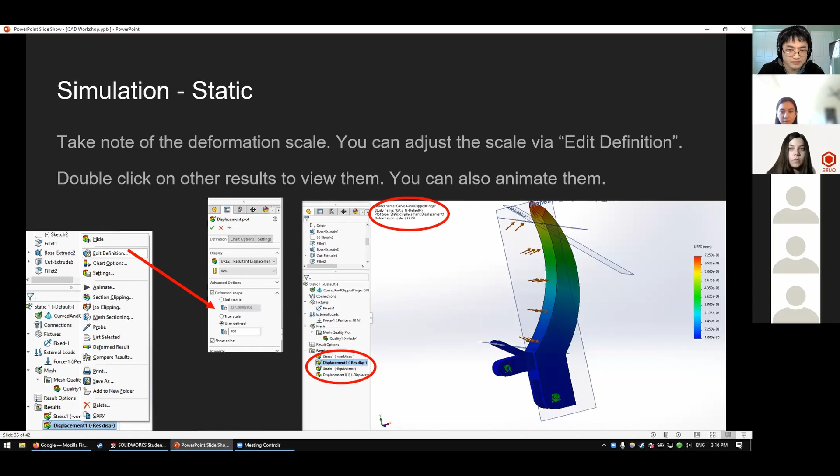Let me show you some of the other studies. So I just talked about static. There are other ones here—you won't see the aerodynamics or fluid stuff here, that's another plugin. But you see here, static, frequency.

If you want to have like another Tacoma Narrows bridge, have it wiggle around and break, you can do frequency, or topology design. I haven't really played around with any of these. If you're super worried about thermal, you can do that too—see how your plastics will deform over time in the heat.

That'd be pretty cool. Buckling, fatigue, nonlinear. Ooh, nonlinear—that one took me, I tried to do this one but it took too long to simulate, so I just closed it. Linear dynamic, submodeling, nonlinear, I presume that just means varying the force over time. So if you want to do that, you can do that too. But static is the fastest and gets you the easiest idea of what's going to change in your design as you apply forces.

So more things here for you to play around with, simulate and animate and check out. Okay, if there's no more questions, I'll move on to the next section about the dynamic simulations, particularly fluids.

Okay, so for fluids, it's pretty similar to what you might expect in the static simulations. First, enable the simulate plugin—it's called SolidWorks Flow Simulations, right to the right of the simulations here. Instead of clicking new, I clicked on wizard because I don't want to go through all the manual steps. There's a bunch of steps here, actually a lot more than in the static simulations, but I boiled it down to just three that are important.

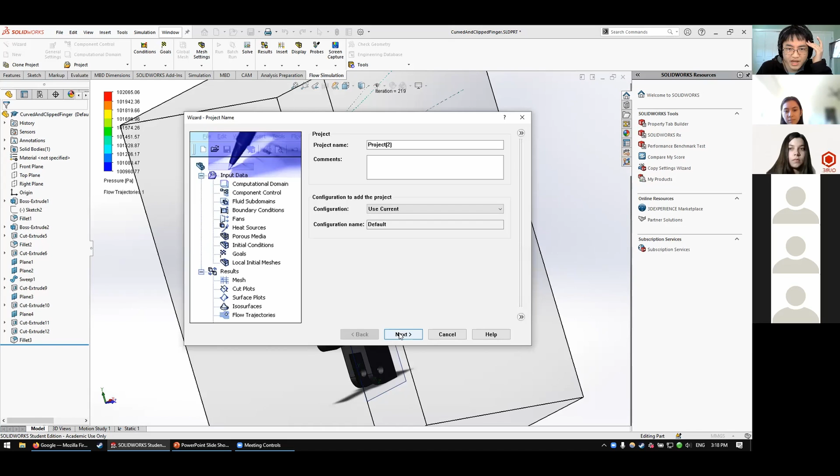So when you hit wizard, you're prompted to do a bunch of stuff. There's a lot of windows here, but to show you the important ones: I skip through unit system, I'm fine with the standard SI units. And you'll probably want to select external for the most part—external is what you usually want, especially for aerodynamics, an external thing flowing across it.

And then I don't exclude anything, I'm fine with that. Well, I should probably exclude internal space actually, but that's fine, I'll keep it.

And then if you're worried about water, you use water under liquids at the very bottom here, or you can do air up here. Then click on add—you can do multiple fluids at once. Why is it H2O? Okay, cool.

And then wall conditions—I don't know what this is, so I just left it as is. For things you don't know, leave it as is; the wizard knows what to do, or you click on help and read into it. But I clicked next, I skipped through everything I didn't know about.

I set the velocity in the x direction to be 1 meter per second. You can also set it by Mach number, so you can do like how your cow is going to be aerodynamic, like Mach 3 or something. So if you want to do aerodynamic cows, you can do that at Mach 3.

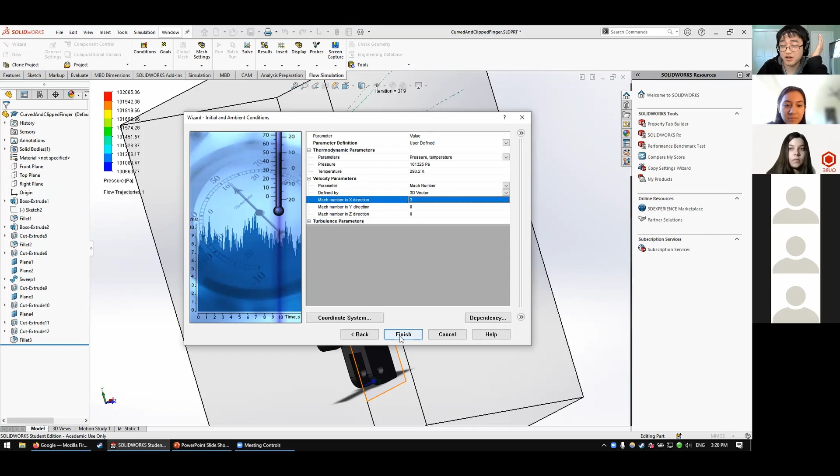Click on finish and it'll start processing. I won't click finish because it'll take me 15 minutes to process. So trust me, once it's finished, you'll see this—so yeah, you won't see this actually, you will see something else. Let me see if I can show you where it was.

See here on the left: feature manager, configuration manager, appearances—you might remember these, but if you click the arrow at the very far right, there's the CAM manager, and to the right of that, simulation flow analysis. So here's where the stuff is. I previously made project 1 with water, I believe, flowing at 1 meter per second in the X direction.

So at the curve—let me delete this. Okay, so once your simulation is done, you see nothing—you get this, it looks like nothing's happened. It's a big letdown. So the trick to seeing stuff is you right click on one of these and hit add something.

So I want to see the flow trajectories—how the water is going to curve away from it, what's going to take the brunt of the force, how it curves away, what part of it is water dynamic. So I right click on it, insert.

And then it lets me choose a pattern. I'll click on this guy. You can click on more guys too, I presume. Delete that, I'll just choose one face. Number of points, I'll do 100. Let's see how that goes.

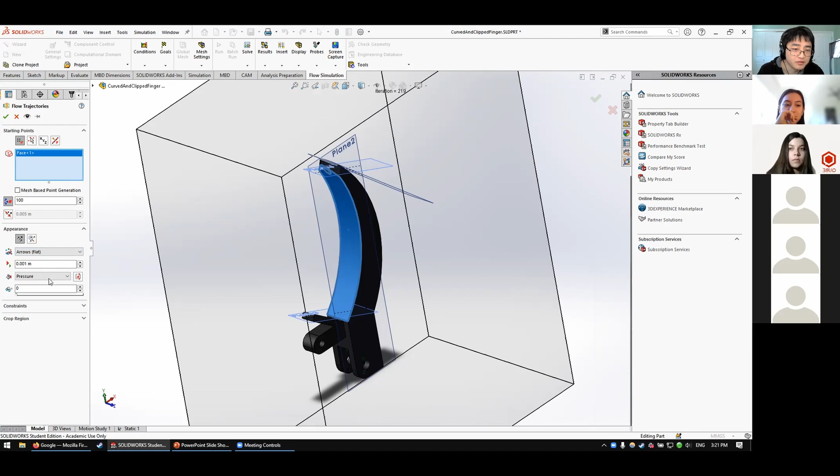Static or dynamic? That's cool. I think I'll just do static for now. And then crop region, constraints, seems fine to me. Okay, let's go. So once again, if you don't know what it is, the defaults are probably good enough.

Okay, I like that, look at that. It's not a cow, unfortunately, but it is pretty not aerodynamic. Look at all that red stuff right there. So the red stuff says pressure in pascals.

So a lot of pressure happening here. It's not curving the air or fluid away nicely or softly, it's like crashing head on. So that's not really that good, but we're not expecting the water to come crashing at it in this direction, so it's okay. Notice how all these arrows curve around.

If you remember your calculus classes, you might remember something about derivatives. Derivatives come into play here, and gradients, and I forgot what it was. Gradients and something else, derivative fields, or I forgot what it's called. I had it written down here. Vector fields, yeah, vector fields and gradients are coming into play right here.

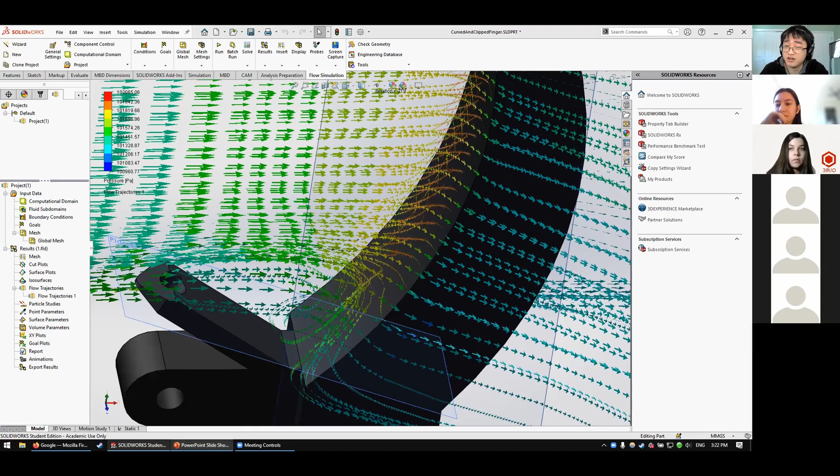They're calculating the rate of change at each point, pretty much where the cell's going to go, how much force is being applied at each point. So that's what's happening here. It's really cool, except they're not doing it like in a grid, they're doing it on the path of each one. So you see how stuff curves around it.

Nothing's going through the hole. I'm very surprised, it might just be because I'm not choosing enough points, but nothing's going through the hole. Okay, that's pretty cool, so you can do this with your own designs. I think you can do it with assemblies, but you will want a beefy computer for that. So be careful, don't run it on a laptop, it might start burning stuff up. Doing this one small piece took 15 minutes for me, so be careful what you do.

Yeah, so there's other stuff too. I did flow trajectories, I presume you can do flow trajectories and select the coordinate planes, the front plane, top plane, right plane, whatever that was called. And then I'll probably do a lot more things, but I just chose this front plane to see what paths will hit it and bounce off of it and ignore everything else kind of thing. So that's what selecting that did.

You can select multiple things at once, I believe, and I'll say show me this, stuff that hits this, and also stuff that hits that. So select what you want and it'll show you what you want to see. You can do a bunch of other stuff. I didn't play around with the tool that much, but there are a lot more tools you can use to see how stuff will interact with the fluids it's traveling through.

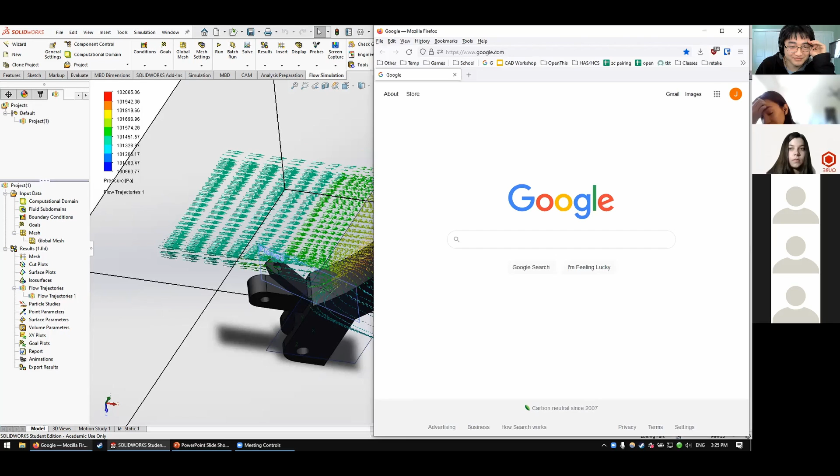Okay, I want to run cables. Any other questions about simulation, static or dynamic, before we head on to the next parts? We'll probably talk about cable routing, and then appearances, renders, photo views, backgrounds, camera views, etc.

Yeah, simulation is very cool. It's a nice tool to have. It looks very impressive. So if you want to beef up some publication material you're sending out to other people, stick a photo on there with your flow simulation. Makes you look very professional. See, look at that, very cool.

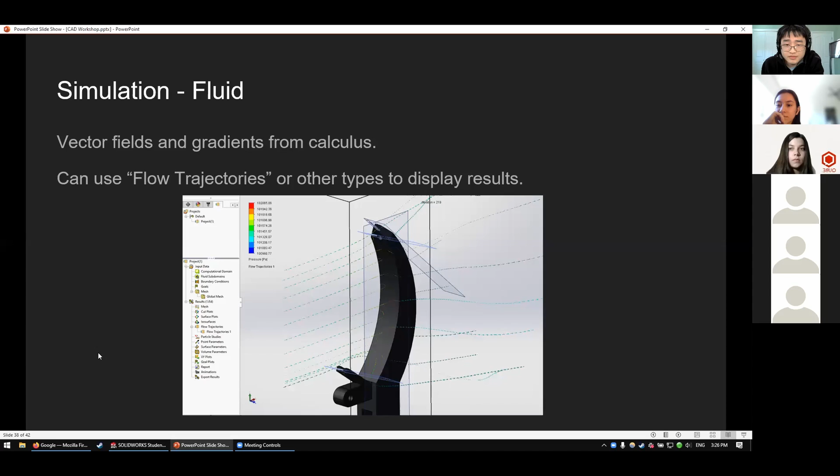Next up is routing cables. I'll do a quick touch on this before I pass it off to Naomi for appearances and stuff, but I'll talk about routing cables real quickly. So yesterday we talked about swept bosses, where you sketch the cross section of the pipe on one plane, and then on a perpendicular plane you sketch, using a spline, the path the pipe's going to take. You could do that to route cables. It's a bit of a hassle though to do it for every single cable because you've got to do a bunch of splines, and no one likes splines.

But if you don't like splines, and you probably are one of those people who don't like splines, you can probably just use the auto router. There's a nice plugin for everything on SolidWorks for routing cables and pipes and tubes. It's right here next to SolidWorks simulation.

I can't quite get it to work correctly, but let me just show you where you can find it. I'm going to open up a recent file. I'll open up a small guy, this is kind of big, I'll just open up ROV. Okay, I'll open up the whole robot and I'll see if I can route the cables.

I think I tried using this tool once. It couldn't work for me, but I'll see how it goes. Or at least ideally for you guys, you can try to use it. It could be something you can do to make your designs nice and pretty when you have wires and PCBs and everything on your design.

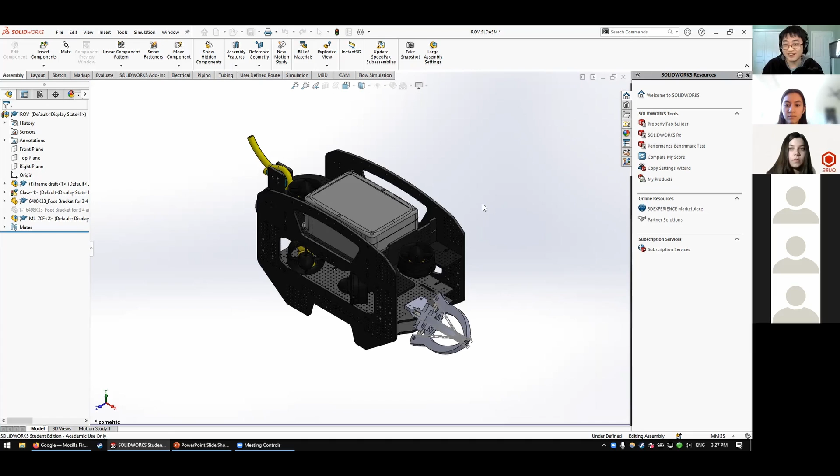It looks really nice. So currently I have an assembly here. It has a bunch of stuff on it, and Zoom is telling me low system resources to be expected when I open up this file.

Okay, so I have here at the very back this is the tether. Someone else uses a spline and traces along a path to make a path of the pipe that's going to be having a bunch of stuff inside of it. So if I want to route these cables now to somewhere else on the robot, going into the electronics enclosure, then I could do that.

And to do that, I would check the SolidWorks add-in, make sure it's highlighted, and I have the plugin enabled. And then when you have this enabled, it opens up three new tabs for you: electrical, piping, and tubing tabs.

I will see how piping goes, and I will try to do this. So start a pipe on the fly. I will start at a point. So sub-assembly, I want to start it at this guy over here. Okay, reverse the direction. And then, oops, okay, choose that guy.

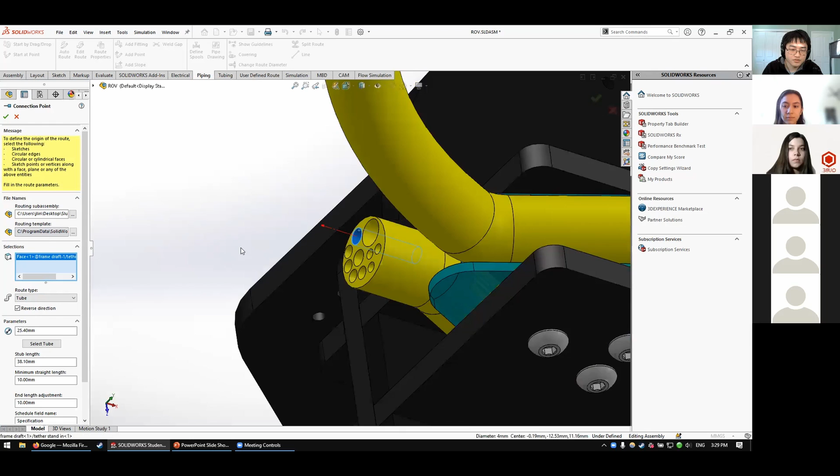And it just goes straight out. I thought there should be a way to go from A to B kind of thing - routing template. Okay, I think if you select only a starting point, then it should just make a single one. Bends, use flexible hoses, tube, coverings, parameters, C point name.

Yeah, I couldn't quite get this to work correctly, but that is not the right direction. But yeah, you could use this - if you get it, if you figure it out, you can probably use this to simplify your life instead of doing sweeps like this. Sweeps are nice and cool, but you can probably just do the auto router.

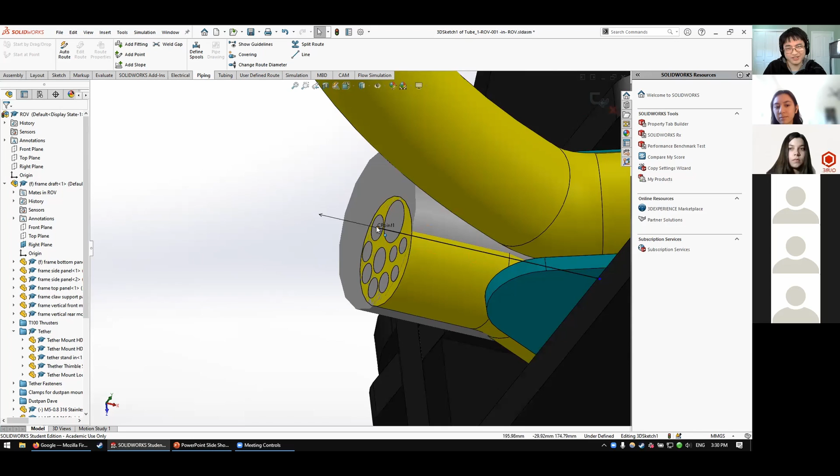Okay, so yeah, I'm not going to dig into this too much because I don't tend to use it all that much, but something for you to look out for if you want to use it yourself. Okay, with that said, let me pull up the slides again, and I'll probably pass it off to Naomi now to look at appearances, materials, and hopefully we can get through some of the render stuff together.

Okay, let me stop my share, and there we go. All right, so appearances, materials, all this publication stuff isn't really all that useful. Where did SolidWorks go? Oh no, I think my computer is having issues running this many things at once.

Is it not letting you focus SolidWorks? Where's... oh there it is. Dragging the window, I think it works. There we go, okay, we're good.

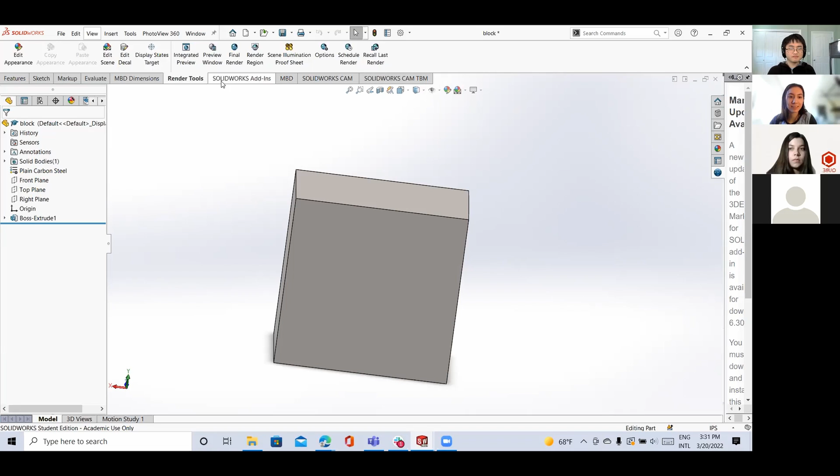So here we have a part, and first we can edit... let me get rid of this so I can show you. It's gone, okay. So first we can apply scenes and materials and appearances and all of that.

You can apply it up here. We have this edit appearance thing and apply scene. I really like this Urban 5 and this background, I think they're really fun. But yeah, you can get rid of them.

But if you want to make a render, you go to SolidWorks add-ins and then you select the Photo View 360, and that will make the Render Tools tab pop up. And then you have those same options up here.

So we can also edit the material, but let's try editing the appearance. So we can apply a color. All these fun things, we can also...

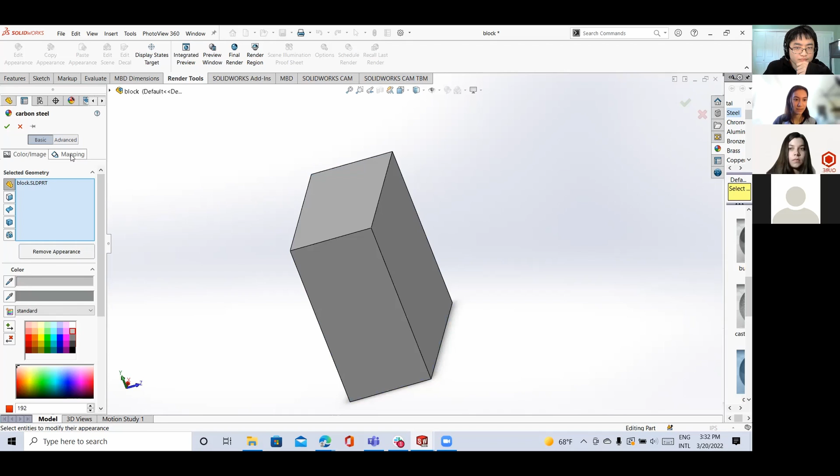Okay, we're not gonna make it like that. Yeah, I think on the left-hand side of the screen, you should also see a slightly hidden menu, sorry, on the right side of the screen, there's a menu with appearances as well. That lets you just drag and drop stuff, like you drag and drop a certain style onto the surface and it paints it for you. So if you don't want to go through the whole hassle of manually doing stuff, just drag and drop it.

I think it works. Yeah, my computer doesn't render things very well unless I do a full render. That's all so good. We're gonna go with burnished steel, and I want to make it... let's make it that kind of color. And then you check the checkbox and it's done.

And we can choose a background. I really like the parking lot one. Fun, okay, so now what's the next thing?

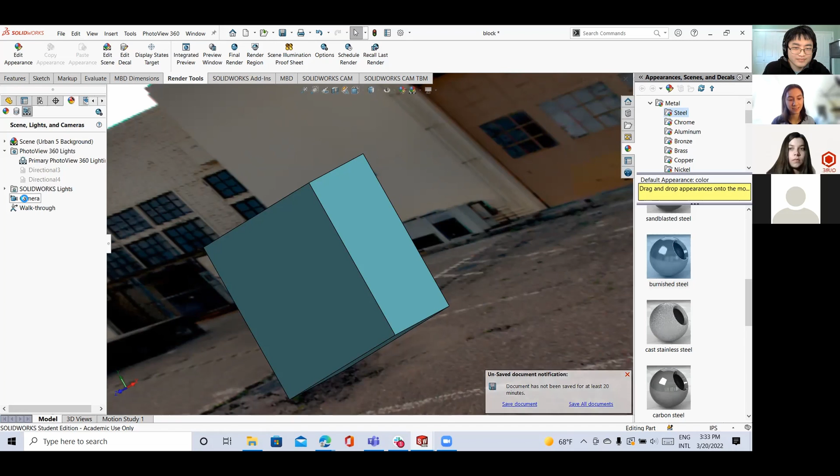Camera views. Okay, so for camera views, it's kind of hidden, but you go to the display manager and then you come over to this little tab here, which is view, scene, lights, and cameras. And then you come down to camera. Oh, it's unsaved, remember to save your work. And then you click add camera.

So now I have a camera in here and I can zoom out, and this window on the right shows what my camera is seeing, and the window on the left allows me to edit the camera. So I can bring it in like this.

The yellow dot lets me move the camera, and the red dot lets me move where the camera is aimed. And then I could also pick a target, so if I picked that, then the camera is looking at that line. I can pick this dot right here.

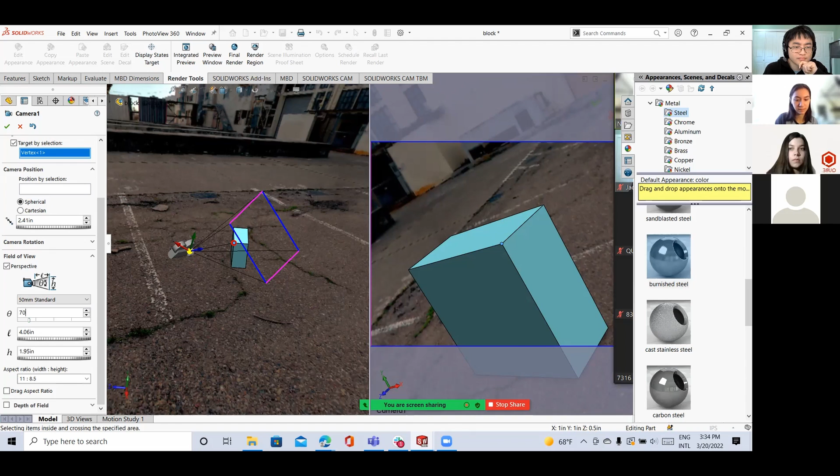And then there are all these controls over here, so I can change things. There's also the angle, which changes the field of view, I think. I changed it to like 70. Yeah, it gives it a bigger FOV. So this is useful if you're testing camera FOVs.

We often have to decide what FOV of camera to choose, like 120, 90, that kind of thing. So if we were to position a camera on our CAD and test between 120 and 90, we could decide which camera to purchase. So that's good, that'll be good for the render.

So now that we have that, we can go to our preview window. So now we're going to start actually trying to make the render. And this honestly might crash my computer with all these things running, but we're going to give it a go. So the preview window is going to show you what your render is going to look like, and while you're editing all your settings, and then the final render button, that's going to actually make your render.

Oh, the lights are so dim. Okay, so we need to work with some lighting. Appearance, where are the lights? Photo view 360 lights, I believe.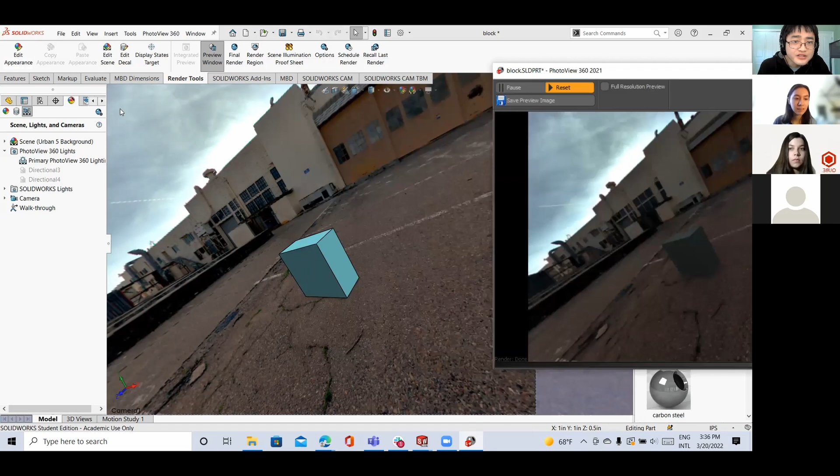360, on the left-hand side, let me see if we can annotate on the screen. Yeah, you right-click on that guy or add some more directional lights or ambient lighting. Well, it's not too dim. It is pretty dim, actually. Yeah, it's pretty dim, okay.

Yeah, I usually don't mess with the lights, but this is really dim for some reason. So rendering brightness, I can up this, I think. Let's just make it 7 and see what happens.

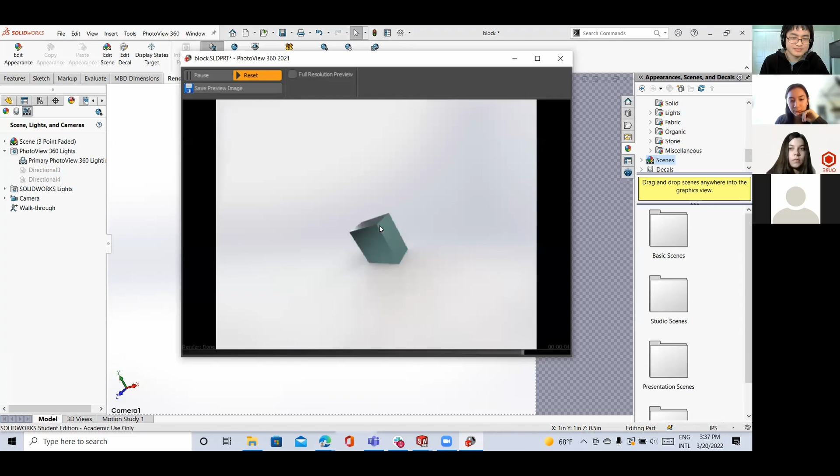Okay, I'm going to try changing my background to something normal, and let's see how that changes the preview. All right, the preview looks really horrible, but we're just going to go ahead and render it. So I'm going to click final render, and now it's going to take a little bit, but it's going to go.

And now we have a really pretty picture of a box. This looks much more impressive if you use an impressive part, but I think that would crash my computer. So you can save this: save image, save. You can save it anywhere you want on your computer, and then you're done. Press the escape button, and you're good.

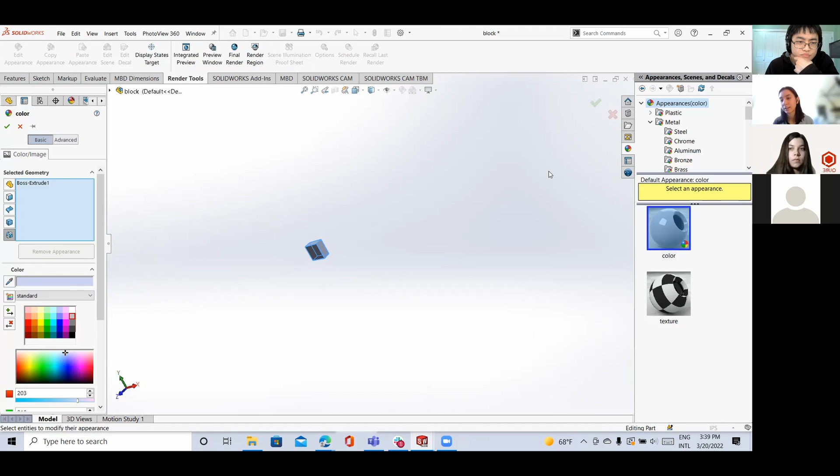You have your render. I see a question in the chat: if you have two extrudes on a single part, how can you make the part have two different colors? You can go to the feature tree over here, select this, and go to appearances, then add the color to that specific feature instead of the whole part. Or you can apply a material to that specific feature. I know you can apply appearances to singular parts, but I don't think I've ever tried adding different appearances to different faces or features on the same part. That's pretty cool, didn't know that.

Where do you click final? Let me share my screen again. There's a question—someone asked where do you click final render. It's in render tools, right next to the preview window, right here, and that'll give you your final render.

Okay, I also wanted to show pretty briefly how we've used camera views on our robot. You heard Naomi mention earlier that we used it to make sure the cameras we place in the robot are going to face something important. Let me show you what Naomi meant by that. So here, this is an ROV from a couple of years ago. I have so many tags because so many add-ons are enabled right now. Let's go ahead and see how these cameras are going to see.

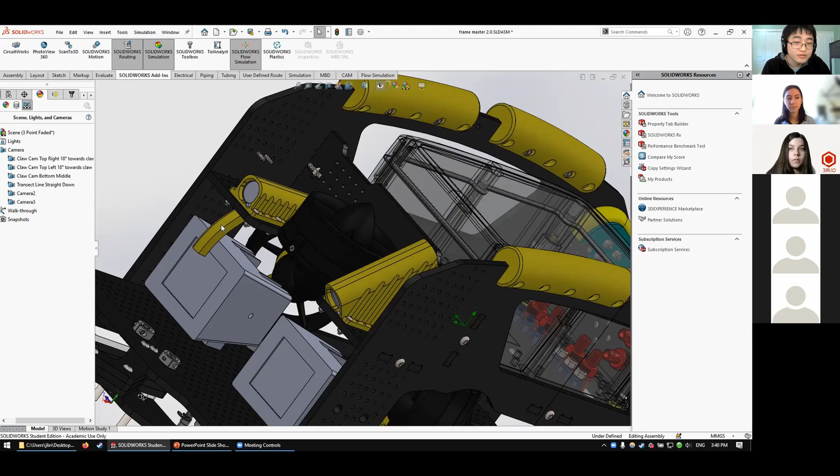Look, it has this weird horn still because I didn't fix that yet. Towards the claw, let's see. I want to see this guy—camera view. Okay, I want to see this guy, but in... yeah, so this will give me a simulation of what this camera is going to see.

So you can use these as your own tools if you want to add cameras to your robot. If you want to figure out what the FOV is, we basically aim the camera straight at a whiteboard, measure the length, height, and distance, and then use some trigonometry to figure out the FOV. The manufacturer probably gives you something like, oh, this is a 90 FOV camera or 120 FOV camera.

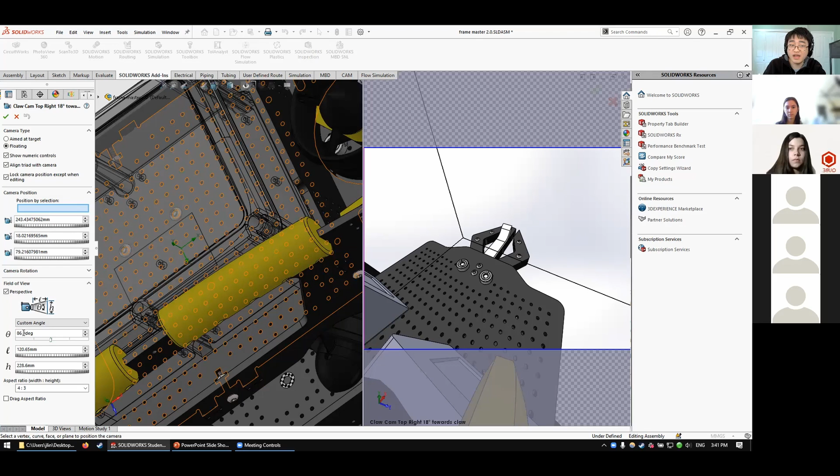But then you still need to put it into SolidWorks format, which requires you to give it the theta, the vertical degrees, the distance from whatever you're aiming at, and the height of whatever you're aiming at. So it requires you to know these three parameters in order to get the one you want. If you want to make your own camera views, be sure to test it out on a whiteboard, do the calculations, write down stuff, and then punch it in here, and you're good to go.

So that's something you can do, and how we've used it ourselves on the robot. Pretty cool. Okay, let me see. There's also something else I wanted to show, but I forgot what it was. Let me see if I can remember it.

I think we talked about pretty much everything we wanted to go over today. We did assemblies, we did mating, we did evaluation tools like thickness checking, interference checking, and stuff. We talked about simulation for a good long while—static simulations and dynamic simulations. Those are pretty fun, aerodynamics, that is. We also talked about publication stuff, how you make sure stuff looks nice and pretty.

Oh yeah, exploded view—that's what I want to go for. Let me see if I can pull up exploded view. I don't think I've set it up correctly for this one. Let me open up a smaller one that won't crash my computer, and I'll see if I can show you exploded view. Okay, it's going to take a while to close—it's a humongous file. Okay, so I have here good old Froggy as my background for my render.

Let me see if I can get exploded view. So exploded view, as the name suggests, basically blows apart all the parts in a nice split diagram. I think it's under configurations, actually. Let me see if I can add here. What's it?

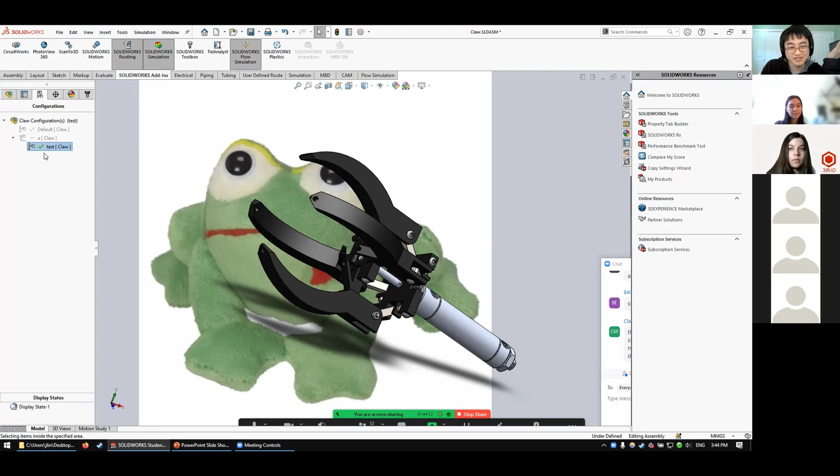Did that do anything? I don't think it did anything. That's unfortunate. But if you get it to work, it's probably under here, configurations. I need to look into this more, but it should be there. In the meantime, you can look at Froggy in the background.

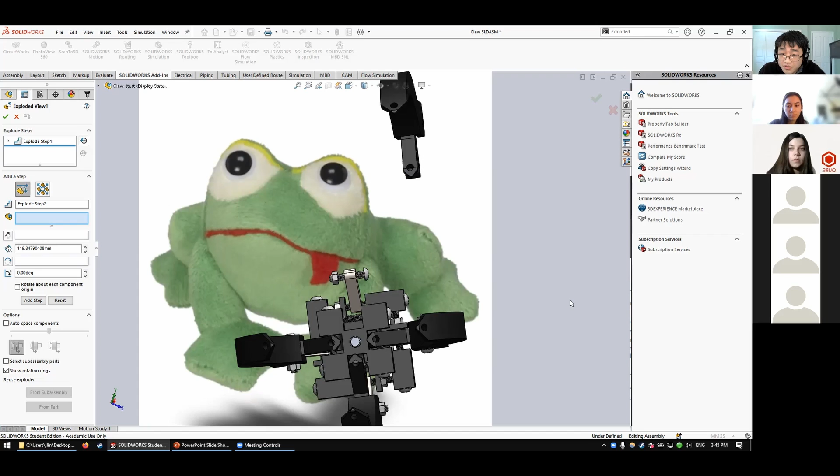Okay, I have a question. For exploded view, does it get separated based on different folders, or how does it distinguish between different mechanisms? Okay, let's find out here actually.

So there's a bunch of steps, it seems. Let me see, step 1. I want another step. Okay, step 1 has this and that. Let me add another step to that. Editing explode step 1 — I don't want to add to that, I want to add a new step.

Okay, it looks like exploded view distinguishes based on which parts you select. So if you select different parts, they will, of course, explode different things. So I just exploded one part of the claw. You can animate it — it's pretty cool. So if you want to get a nice blow-up view of your robot, you can do that. I want to edit this and add a step.

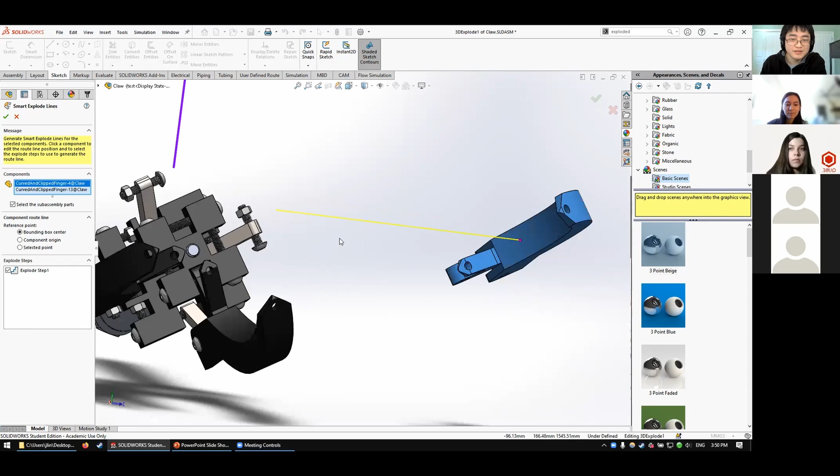Yeah, we can give some advice if you have any questions or want feedback for stuff you're working on. We can take a look and see how we can help. Doesn't have to be in SolidWorks, could be in other software too, but SolidWorks is what we're best at. There's still some general tips that apply to pretty much all 3D modeling.

Okay, another question in the chat: is there a way to animate parts that move, like linear slides?

Get the component file straight from manufacturers. So to get the parts straight from manufacturers, it depends whether they give it like a singular monolithic part they cannot adjust at all, or did they give it as an assembly that's multiple parts?

If it's an assembly, then it's easier to animate because then you can have a linear mate on the moving part and the fixed part, and that's pretty easy then. But if it is a singular component, then it's a lot harder to animate.

I think you'll see here, we got this piston from the manufacturer, McMaster, and it is one singular part. So this guy in the center cannot move. So in order to move stuff, we just move this guy, and notice how the centerpiece does not move. The centerpiece should move with the center black piece.

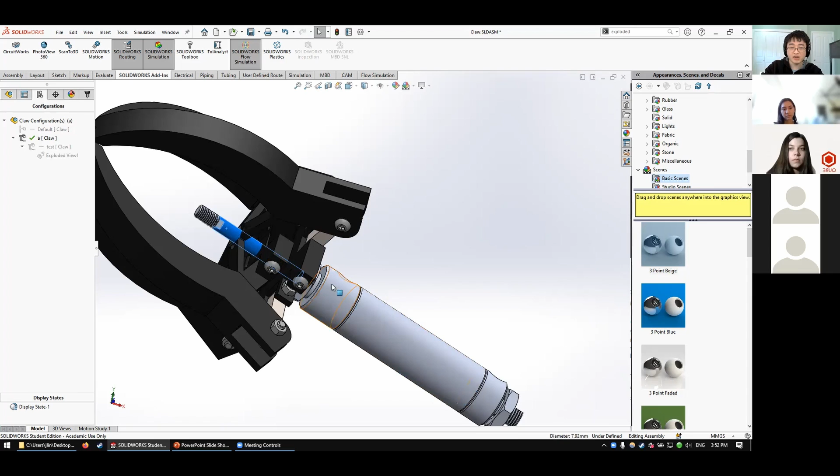So to get around it, we just made this movable here. To make the manufacturer part movable, ideally they give you an assembly file with multiple parts that you can animate or mate yourself. If not, though, you may need to remake stuff or see if you can use more advanced features of SolidWorks to chop an existing monolithic part into multiple subparts, and then you can make it move. So there's ways around it, but it takes more work. And honestly, I don't bother because this gets the job done.

So just to reiterate, for a linear slide like this, you would want a limit distance mate unless you drag it up and down. By animate, did you mean like you want this guy to go by itself forever kind of thing? Maybe you want to take a screen share, or get a nice animated video of it going like this forever. I don't think you can animate it to go up and down forever, but you can just do a limit distance mate or other mates that will allow a certain range of motion.

Okay, oh good, glad to answer your question.

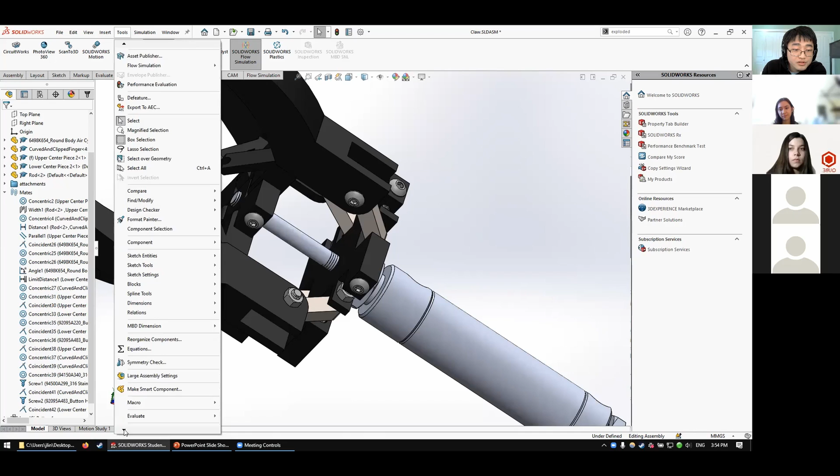Okay. Oh man, I have too many add-ins loaded. It's not going good. Okay, let me turn off some add-ins. No more routing, I have electrical opened. So I want to go to tools, SolidWorks applications, express products, CAM. Where's my electrical? I don't know where the button is.

So I will go to the search bar. It's not helping me. Okay, maybe it is SolidWorks, I could have sworn it's electrical. Okay, let me see, I am at SolidWorks. Open ECAD file.

Let me see if I can find a random PCB I have lying around. No thanks, no need for installation. I'll just find a random one I have lying around. Eagle files, CAM design blocks, where was it? I don't think it'd be in here. Projects, this is really old, 2018. What the? Okay, well, we'll see how this goes. I don't think this will work actually, it might be broken.

Yeah, continue anyway. Okay, it broke. Let me look real quick if I can dig up an actual working one.